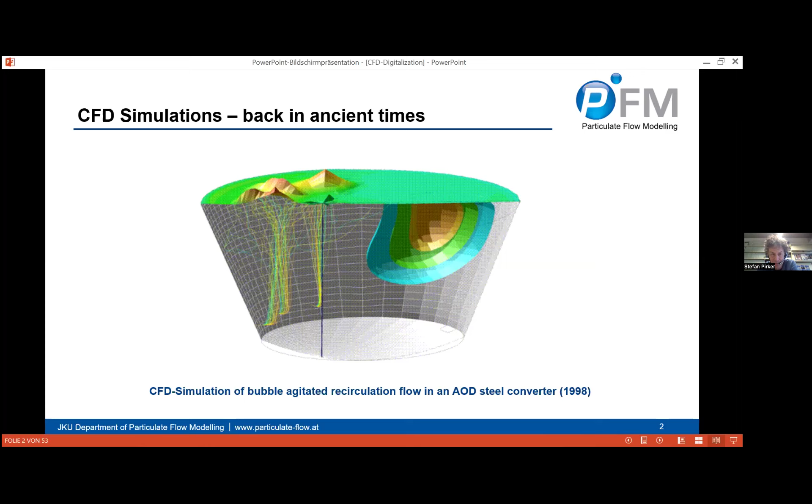And at that time, Fluent was written in Fortran, and we performed the simulation on a structured grid. And at that time we did not have any model to really model the free surface, so we had to deform the grid accordingly to model it. Then about 14 years later,

So, but if we look at it from a different point of view, then we see, okay, also the model portfolio has improved tremendously, and also the resolved spatial and temporal resolution has increased tremendously. Those simulations are way beyond real-time capable. So they can be considered as slow and offline digital models.

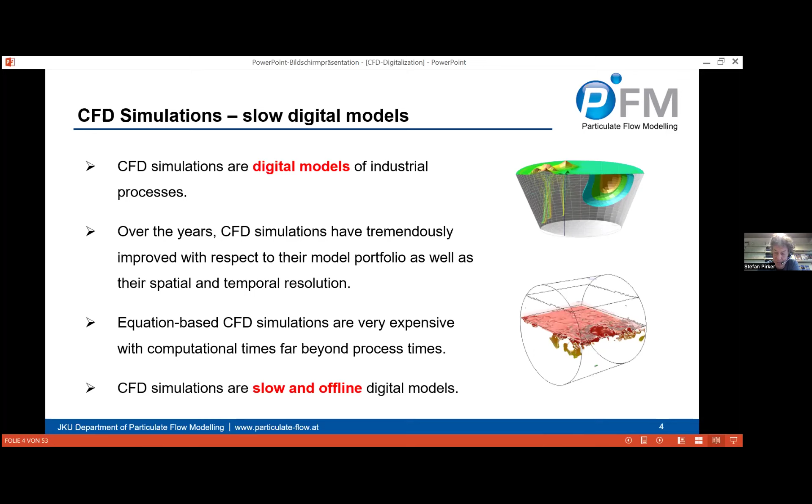And if we would like to achieve what is written in the title of my presentation, so from slow offline simulations to online digital twins of industrial processes, we have to use completely different approaches. So we have to go away from this purely equation-based approach towards some data-assisted approach. And this is the topic of my today's presentation.

So I've organized this presentation in two parts. In the first part, I would like to introduce the concept of recurrent CFD, which is one of the possibilities of data-assisted simulations. And in the second part, I would like to showcase an industrial application, because I've heard that this audience is more on the industrial side. So let's jump into the topic with the first introduction.

Do you see my mouse? Yes, it's visible. No problem.

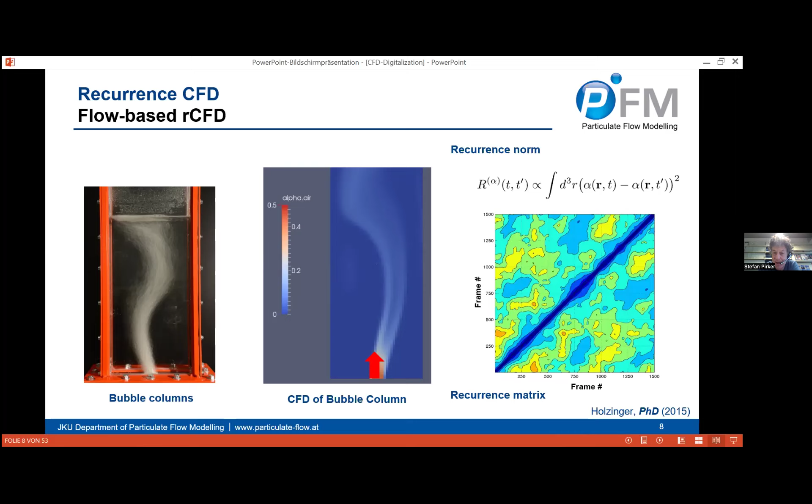So if the plume is on the right-hand side, then this integral will give a low value, if at another instance of time it's also at the right-hand side. And we could also picture this by a recurrence matrix. In the recurrence matrix, we compare the flow situation at different time steps with the flow situation at another time step. Quite naturally, the diagonal is 0, because if you compare a flow situation to itself, the recurrence norm would be

0. So if you restart this movie, then we see that the corresponding recurrence matrix also changes from a chaotic off-diagonal situation to this kind of stripes. And these stripes are a sign for reoccurring flow structures. So a pair of flow situations between this time step and this time step gives a bluish off-diagonal situation, which refers to a good agreement of these two pairs. And the red one would be a bad agreement. This would be if the plume is just on the other side.

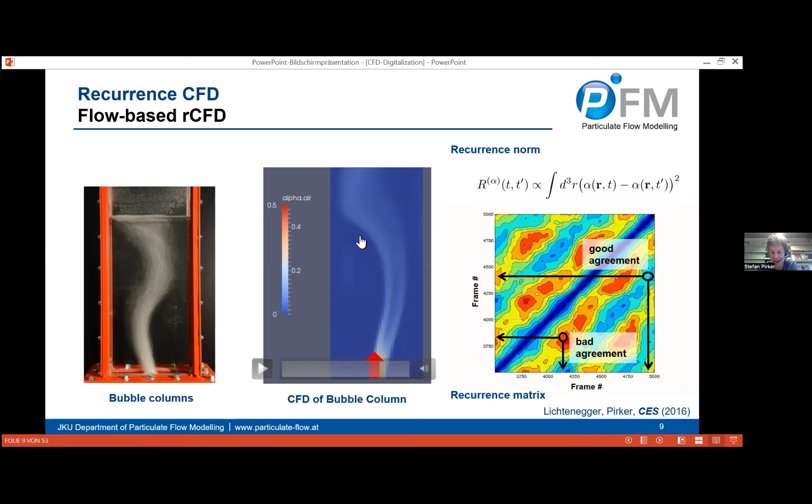Now we could exploit this similarity in order to construct an artificial flow. So we just start by replaying data we have obtained before for sequence 1. Then at the end frame of sequence 1, we just look for a similar frame. In this case, the similar frame is in the past of our database. Then we stitch together, we proceed with the second sequence. And at the end of the second sequence, we look for a similar frame and so on. So we could kind of extrapolate the flow beyond the time span of our database.

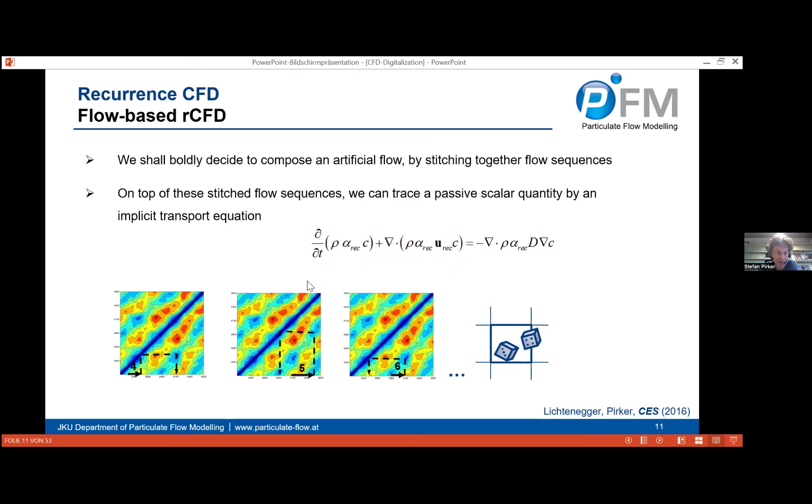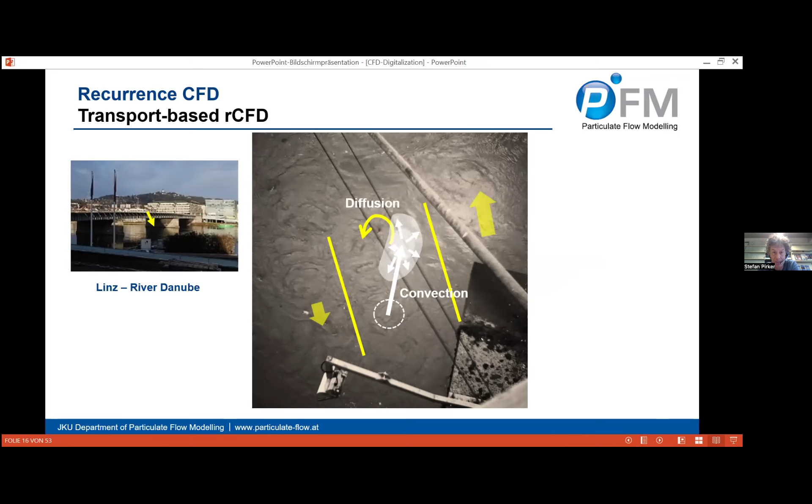What I've described here is labeled flow-based rCFD, and the second flavor is transport-based rCFD. And in order to explain the transport-based, I invite you to Linz, to my hometown. There's the river Danube, and if you look down to the river Danube, you see something like this. So there's a shear flow at the pillar, and if you just imagine to throw some white color into it, then this white color will be affected by fluid flow, so it will move a little bit like this. And from a fluid dynamic perspective, we could decompose this flow situation into convection and diffusion. So we all know that there is a mathematical fundament for this kind of flow, which is Navier-Stokes, and typically we apply a computational grid in order to solve this Navier-Stokes equation, in order to describe this propagation of this white color.

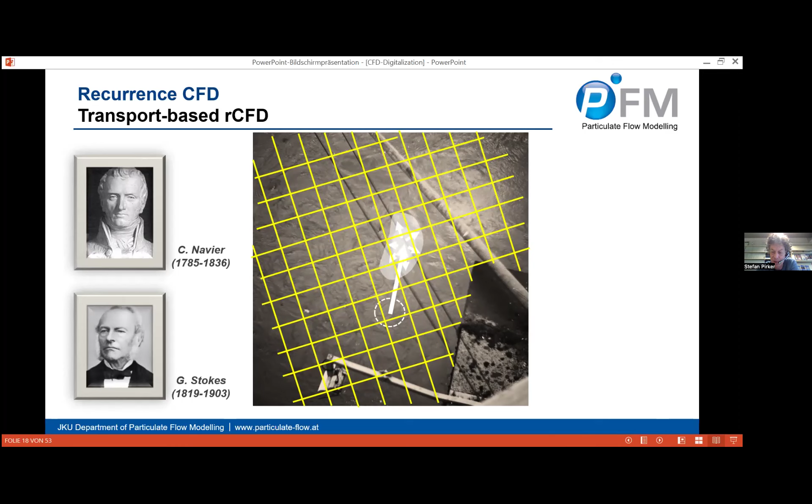However, we could also look at the same situation from a completely different point of view. We could consider this computational grid as a network, a communication network. And once we throw in the white color, we activate one cell. And upon convection, this cell just calls another cell, the receiving cell. And upon diffusion, this receiving cell just shares its information with the neighbors. So that's a very, very crude approximation of convection and diffusion. So we shall boldly decide to replace convection by cell-to-cell shifts and diffusion by face swaps. So this is a very, very crude approximation.

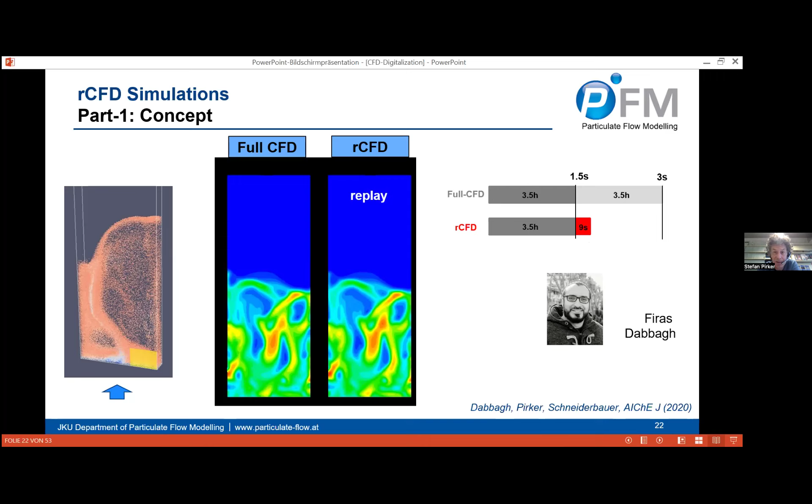So let's see how this compares to each other. And very, very surprisingly, you nearly see no differences. You have to be very careful to see any difference. And in this case, once again, no transport equation is solved. It's just cell-to-cell shifts and face swaps. And due to this simplicity, the simulation time dropped from more than 3 hours to just 9 seconds.

Okay, so I really roughly introduced the concept of rCFD and also addressed mixing in fluidized beds. In the next couple of slides, I would like to talk about segregation in fluidized beds, so polydisperse fluidized beds. And this was work done with Stefan Heinrich's group.

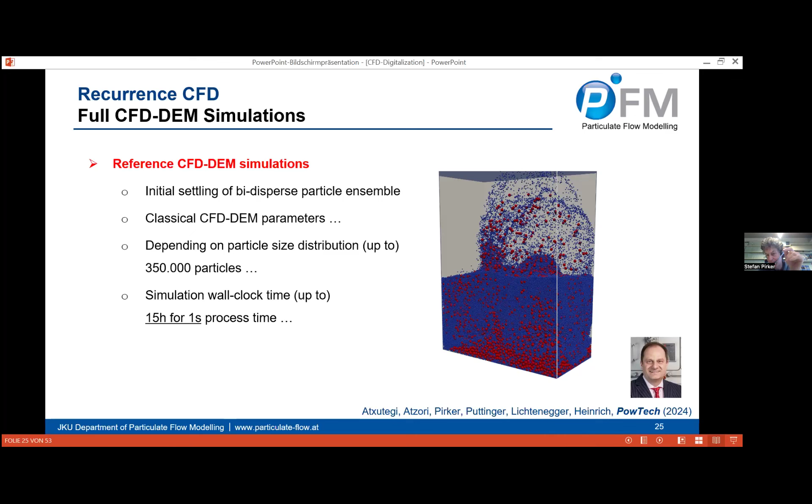So how could we model this in the framework of data-assisted rCFD? We thought about introducing a drift velocity for individual particle fractions. The drift velocity should depend on the difference between the diameter of the particle fraction, so small or large particle, to the Sauter mean diameter. And the difference squared times an empirical constant gives us a drift velocity. And we further implemented this drift velocity as directional face swaps.

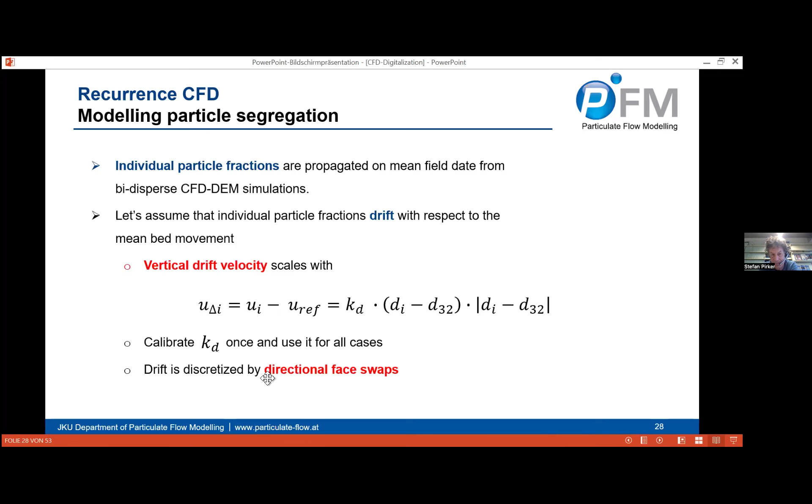And this is a very, very complex situation because we have argon in liquid steel, so a huge density difference. We have the expansion of the argon bubbles towards vacuum within hardly 1 meter. So these bubbles are virtually exploding in the vacuum chamber. And there is no chance to mimic this by some water-air experiments. So we have to trust our simulation tools.

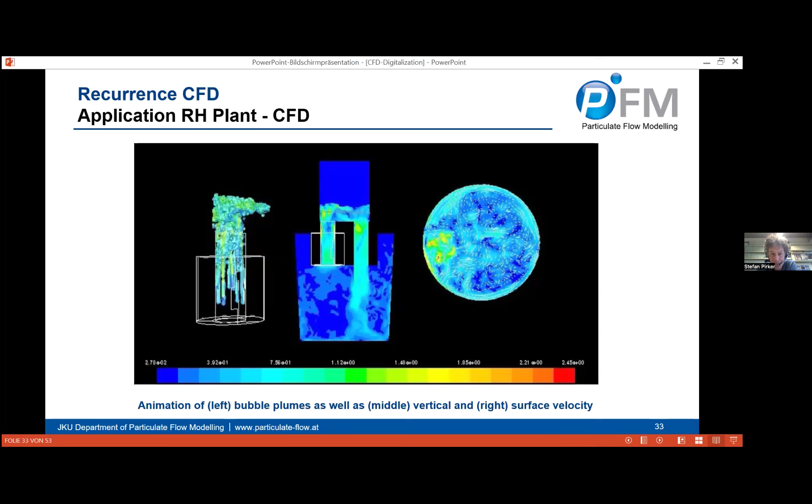In the first attempt to at least get some indication of plausibility, we looked into the real plant. There's a camera installed, and we could make a PIV assessment. And we could at least conclude that a RANS model would not do the job. So we need some scale-resolved simulation in order to picture this recirculation flow. Once we have done this, and we more or less trust CFD, we can deduce our database for rCFD, for recurrence CFD. And once we have recurrence CFD, we could look at, for instance, the distribution of titanium.

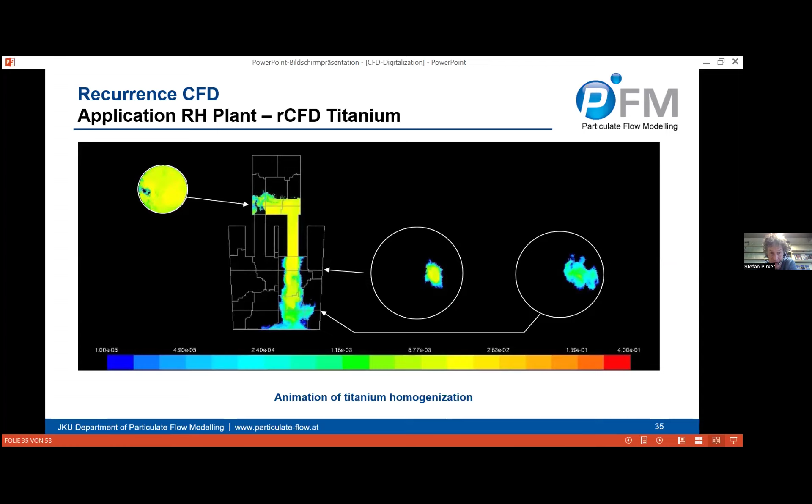So they throw in titanium here on top, and we could virtually follow the dissolution of titanium in real time. So this is a computational grid of 3 million cells, and this simulation runs in real time. So this leads then to histograms like this. So we can assess the heterogeneity of the steel melt over time.

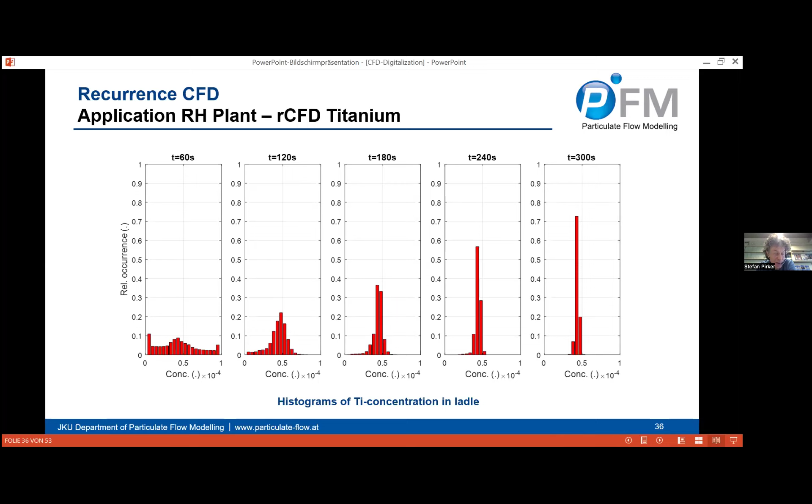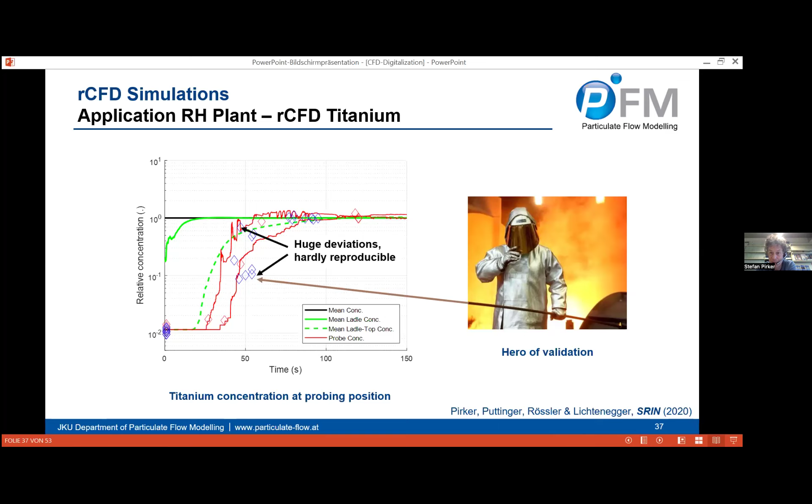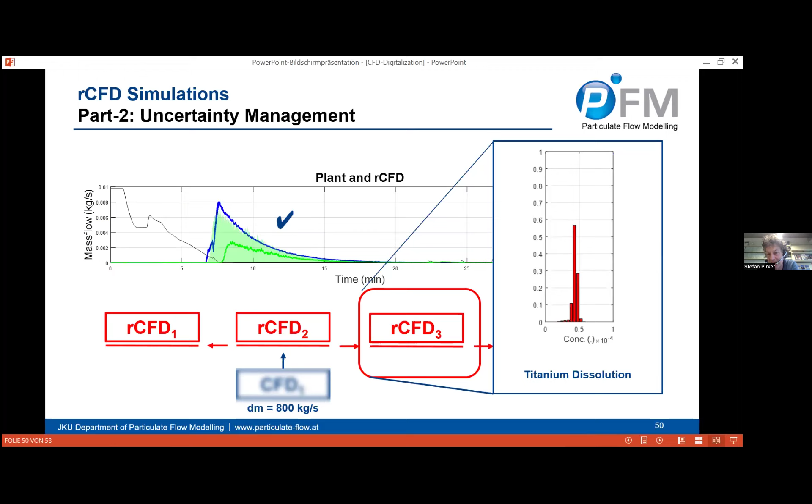And on the fly, so during the operation of the industrial process, we compare the predictions of each of these rCFD simulations with the real measurements. So this is done with this green shaded curve. And once we have done this, we could choose the simulation which fits best. And this is the most reliable or trustworthy simulation. Once we have chosen the most trustworthy simulation, we can then look at other properties of this simulation, which would be, for instance, the dissolution of titanium at this point of time.

Okay, this was a very rough presentation of what we are doing, and I would close this presentation with an outlook. So CFD simulations themselves of industrial processes will continuously improve in future. And I think this holds for fluidized bed simulations as well as for simulations of bubble columns, of any multiphase flow simulation, of any turbulence simulation.

And kind of decoupled from this, we can provide rCFD, so recurrence CFD, as a workflow from this purely equation-based CFD towards an efficient 4-dimensional representation of transport processes. And this is so efficient that in many cases this runs real-time or faster than real-time. So rCFD, that's the third point, runs concurrently to the industrial process. And by on-the-fly comparison to plant data, its reliability can be assessed.

And once we have assessed its reliability, we can just look at a huge amount of data, and we could get valuable information, for instance, about process heterogeneities. And in many cases, process heterogeneities directly relate to product quality or to process failures, like in the case of defluidization. So I hope I'm still in time, and I would like to close this presentation.

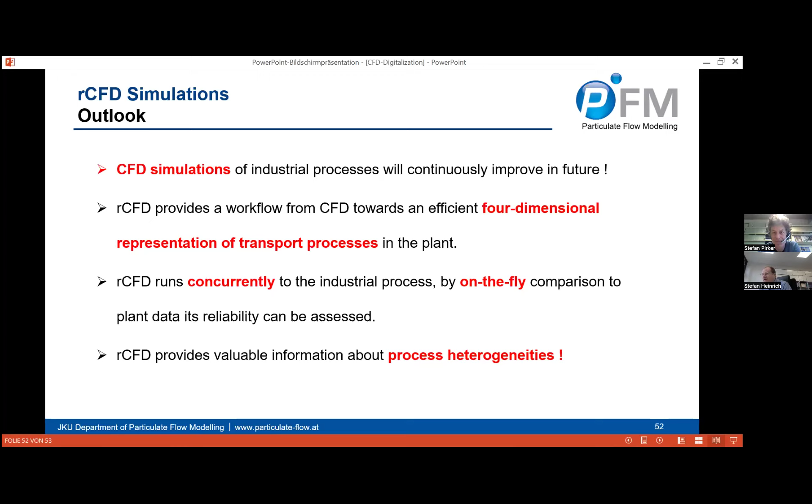Thank you so much, dear Stefan. It's even impressive to see how the recurrence CFD can improve things. Yeah, and this very fast simulation technique allows us to do much more, which has never been done before.

Yeah, there's a first question in the chat, if I can read the question, from Professor Penn from our university in Hamburg here. Thank you for the great talk. Are there certain particle systems, for instance, flow conditions, geometries, particle types, for which recurrence CFD works very well, and others for which you would not recommend the technique? Good question. Okay. Yeah, thank you for this question.

You know, recurrence CFD has this term recurrence in its name. So this is some requirement. So the particle system you have should have some reoccurring flow features. Otherwise, the concept of storing flow features and then addressing them would not work. But you know, this essentially holds for all data-based simulations. So also all these simulation techniques which are coming up now, they somehow rely on the fact that your trained system has already seen similar situations before. So this is maybe one

answer. So it's not suitable for a situation, for instance, if you have hopper discharge; this is not a pseudo-periodic process. But you could also address hopper discharge. If you make many hopper discharges, one after the other, and kind of replay it, then it's possible again. So I'm not sure how strict this criterion is, but as of now, you need to have a pseudo-periodic flow with recurring flow patterns. Yeah. Thanks.

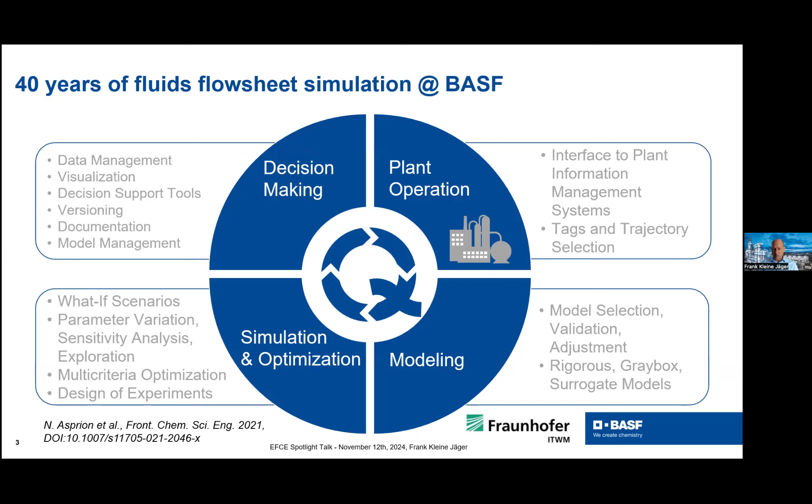That's quite interesting, but this has always been done for fluids, never for solids. So with this new idea, we are trying to bring something really new into BASF: the flowsheet simulation of solids.

Today, on the one hand, we make use of Excel, very simple process modeling tools, where we use empirical correlations. That's working very nicely. But on the other hand, we also make use of very detailed simulation, for example discrete element modeling, CFD, or coupled CFD-DEM. We have very detailed information on the other hand. Now the idea is to bring it all together — this detailed simulation, this information on multi-scales, into the flowsheet modeling approach, but also the information we get from the more simple process modeling.

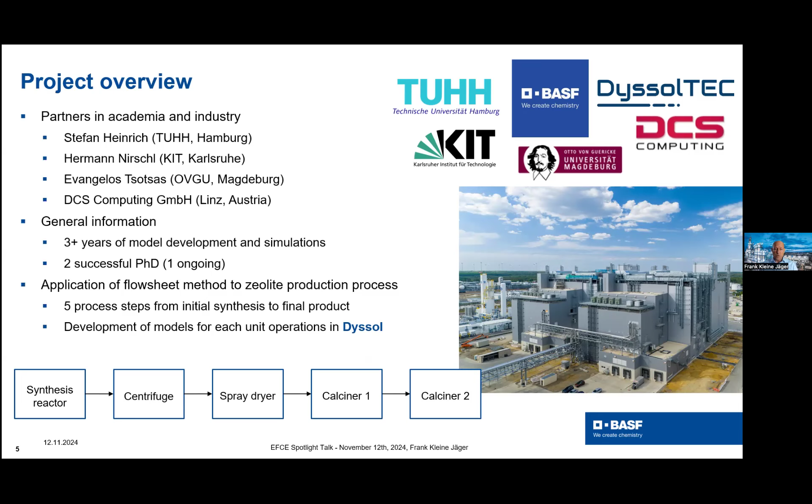The company DyssolTEC, as a startup from the Technical University, was generated and funded.

We also said we need an industry consortium to support this further development. Companies like Evonik and BASF are partnering up now, and we are still looking for others to support us here. With this industry consortium, we believe we will get successful software development on one hand, but more importantly, continuous support over the next years for this software, including access to a new GUI or development of process models. We also see that DyssolTEC is strongly working on advanced features like a sensitivity analysis tool or the automatic process optimization tool.

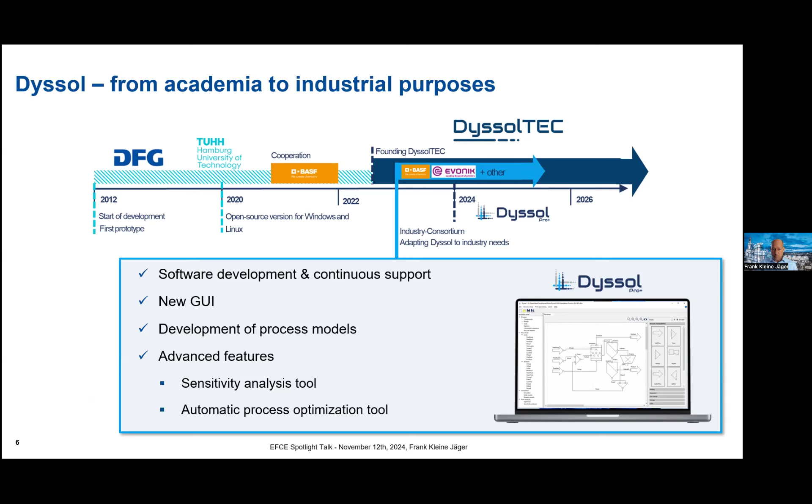Let's take a look at the process we try to mimic. It's about the production of zeolites, typically materials used as a catalyst, an adsorption material, or a molecular sieve. It all starts in the reactor.

Zeolites are typically aluminosilicates that have active sites that act also as a catalyst, formed in a reactor that is typically run in batch mode. Then we hand over this product to a more continuously operated sequence of unit operations.

It starts here with the centrifuge. Here we have input parameters like the mass flow, the solids concentration, and the particle size distribution that comes out of the reactor.

We track these parameters going to a nozzle where we generate a spray that is introduced into the spray dryer. The spray dried product, with residual moisture but also residual carbon content, so with organics, is then fed to the calciner.

We separate this into two parts, calciner 1 and 2, because of the exothermic reactions of the organics, which require this split.

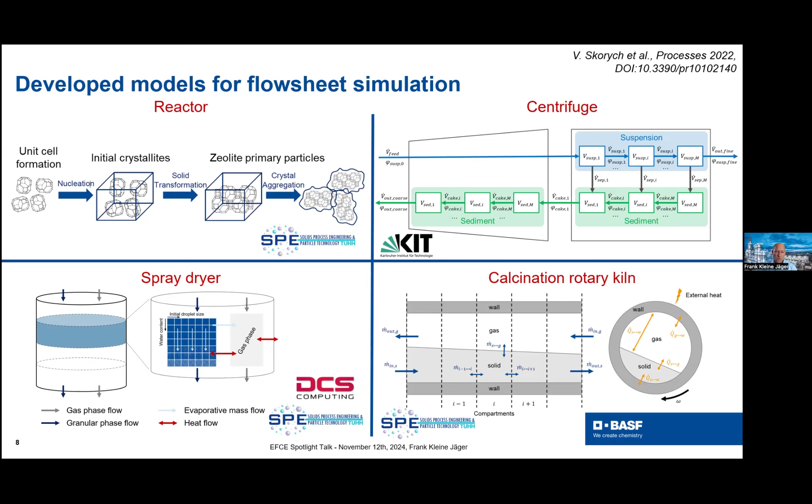First of all, we needed to come up with a suitable model for the precipitation process. In the first step, we tried to get information about the flow profile inside the precipitation vessel by use of CFD computations.

Finally, DEM is used to generate statistics on the particle collisions for various values of process and material parameters, to describe the particle aggregation and particle growth inside these volumes.

This information is then used to find the individual contributions of several empirical agglomeration kernels to the overall growth and the particle size distribution.

The found contributions, along with the variation of process and material parameters, are used to train a data-driven surrogate model of the agglomeration kernel, which is an artificial neural network.

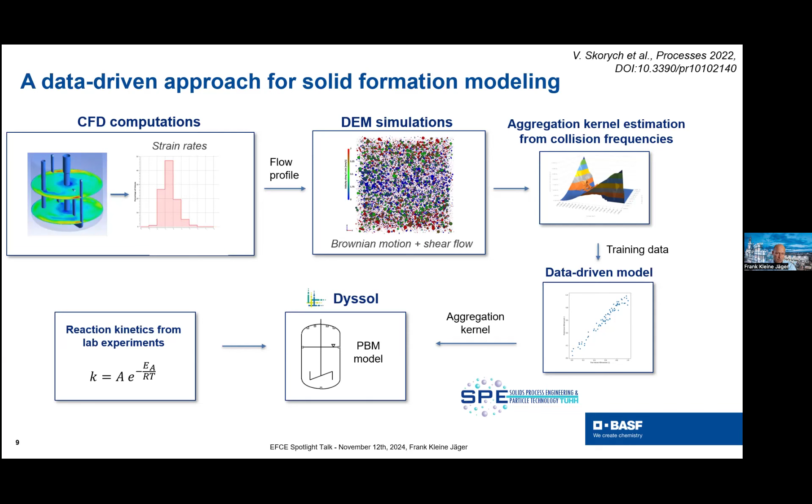The finally derived kernel, together with the information about the reaction kinetics, is applied to build a population balance model used in the flowsheet simulation. That's the first unit operation we were working on.

The second unit operation is a decanter centrifuge, where the synthesized solids are separated from the liquid phase. The feed enters the centrifuge via a pipe, and in the cylindrical and conical bowl a rotating liquid pond is formed. The screw conveyor transfers the sediment from the left to the right-hand side, to the conical part, and the centrate leaves the centrifuge over an overflow weir.

The solid-liquid separation stage is described by a multi-compartment model, developed by colleagues at KIT, from Gleis et al. in Hermann Nirschl's team. It considers sedimentation on the one hand, but also compaction of the cake on the other hand.

To mimic the phenomenon of the spray dryer, a multi-scale and multi-compartment model was developed by Moritz when he was at university. This model considers the different drying kinetics and also the particle solidification inside the spray dryer. In addition, we also take a look at the heat and mass transfer, as well as the heat loss over the spray dryer wall.

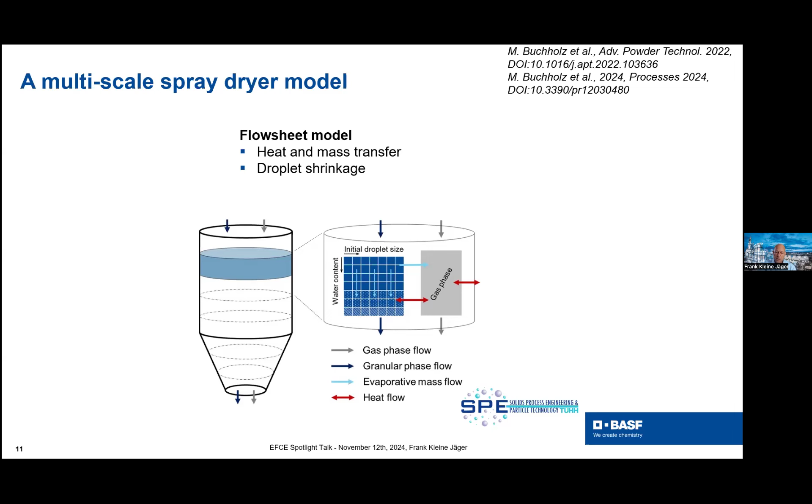We also need some information about the flow inside the spray dryer. Here we make use of CFD simulation to get this information and hand it over to the flowsheet model, which is important to increase the accuracy of the model.

Finally, we also try to get information about the particle morphology. Here we make use of coupled CFD-DEM work of the single droplets. For example, depending on the drying kinetics that are established, we can mimic the formation of different morphologies.

In this case, it's a hollow sphere. Having this information is, of course, of great help if you work in the field of product design.

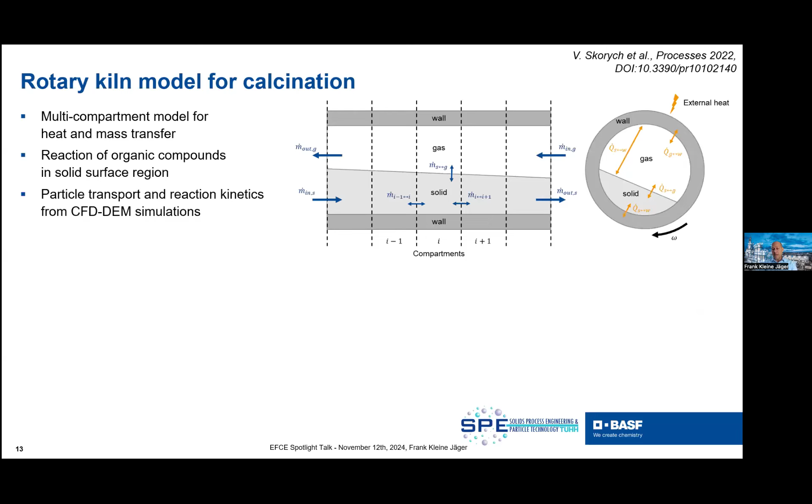Finally, the calcination of the zeolites is performed in a rotary kiln. It is described again by a multi-compartment model that mainly reflects the gradients along the kiln axis. The model is based on work of Küssel from RWTH Aachen.

We have information on particle movement and reaction inside the solid bed, which is extracted from coupled CFD-DEM simulations. We have different phases inside the calciner: the solid phase, the gas phase, and also the wall. Here, of course, we have different heat transfer phenomena.

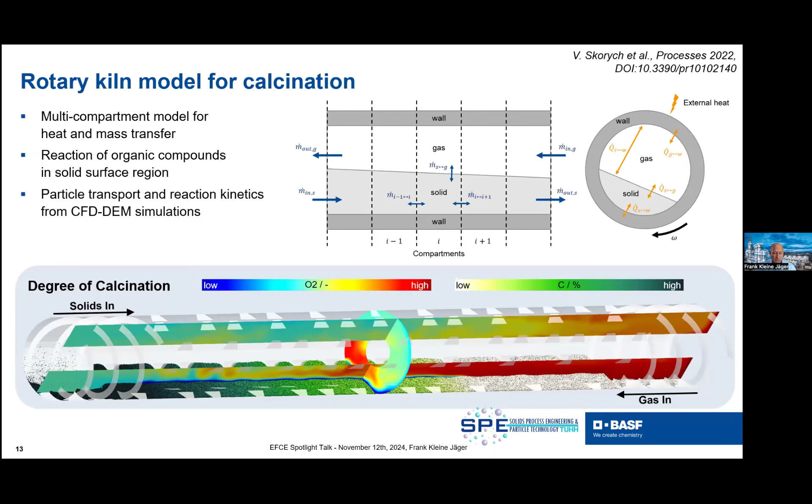We try to get especially information about the temperature at the inner wall of the rotary kiln, because this mainly affects the heat transfer to the gas and also to the solid. To get this information, we set up a collaboration with the University in Magdeburg to get access to the data.

We then started to measure the flow regime. We did this for different materials without the use of internals, mainly to identify the different process parameters. In the second step, we made use of different materials.

We measured the heat transfer using this smart thermocouple setup, again without the use of internals. In the third step, we then tried to vary the internals in number, in size, and in geometry.

We took all this information and used it for feeding our simulation that I showed one slide earlier.

Let us now take a look at the results from the flowsheet simulation. The first part of the flowsheet is the reactor, which we run as a batch process, and then we hand over this data to the continuously run process consisting of the centrifuge, the spray dryer, and the calciner. Here the process time is 2.5 hours.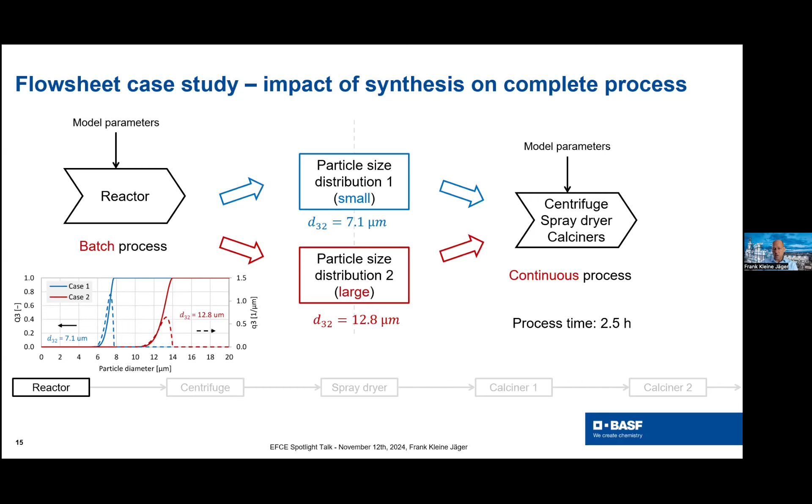In scenario two, we decided to go for a coarser particle size distribution, so here the mean diameter is 12.8 microns, and this is then handed over to the subsequent unit operations.

Now we enter the centrifuge, and here in the top you see case 1, in the bottom scenario 2. You see, due to the different sedimentation behavior of the coarser fraction, you also end up with a higher solid concentration of 19.5% compared to 17.6% for scenario number 1. That means here already we see a huge difference in the different scenarios, and the throughput is also somehow differing because combined with the higher solid loading, we also get a higher mass flow of 1096 compared to 1052 kg per hour.

Now we go to the spray drying. We say that we start with the same droplet size distribution in case 1 and case 2. Now we change from solid loading to water content, and here we see that we start with 82% of moisture loading, and here we see that this is slightly less, but when you take a look at the numbers that are calculated, we see that we end up with more or less the same aggregate particle size distribution of 120 micron in scenario 1 and scenario 2. But again, you see that the mass flow in the two scenarios is different.

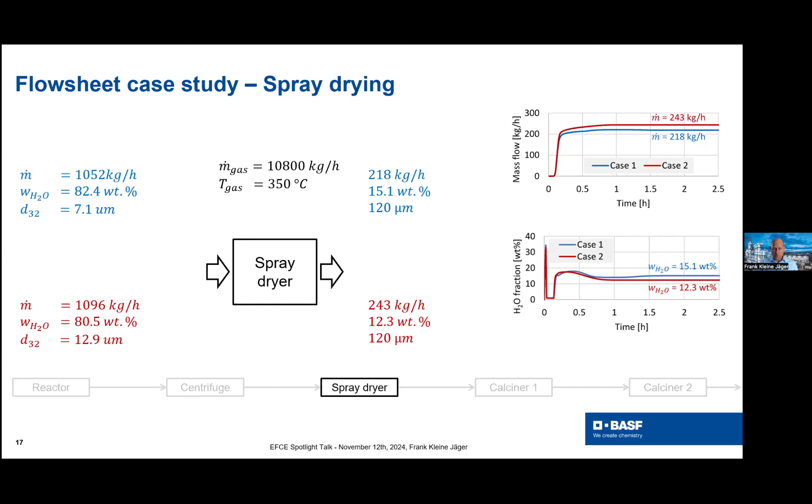From the spray dryer, we now come to the calciner. I said that we also have an organic fraction as part of the solid product. So 10% of the overall solids are organic residues. Here we try to get rid of the residues inside the calciner, and we also try to get rid of the moisture. So we separated the calcination into two single calcining steps. Temperature here, 700 degrees C. We start with an amount of 5% of oxygen. And then we end up with no more residual moisture and a slight reduction of the organic part from 8.5 to 5.7 weight percent.

In scenario 2, we have no more residual moisture as well. And we also see that we have a reduction in the organics here as well. And now finally, the second calciner step, and here the residual moisture on the one hand, but also the total organic mass is coming to zero. But you see in the final end that we end up with two different scenarios of the throughput through the overall process. And this is exactly also what we are seeing in the real world in our production process.

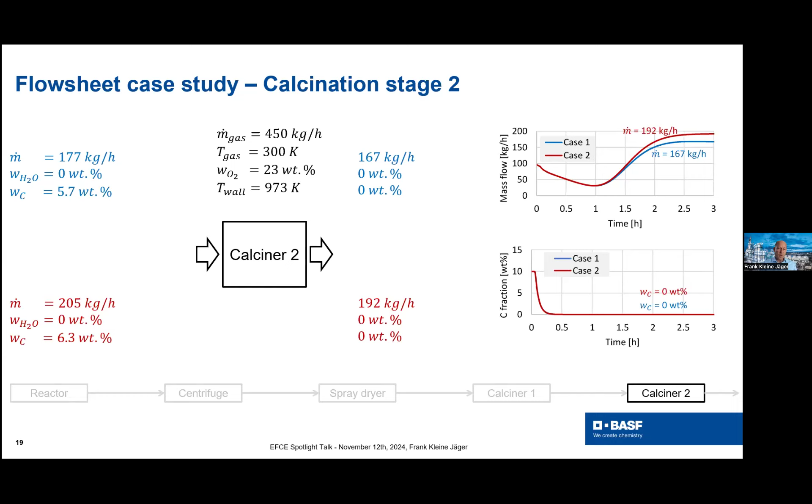So by changing parameters in the precipitation or in the solid liquid separation step, we can definitely influence throughput or even the morphology of our products. And this is something that we were now able to really demonstrate by help of this solids flow sheet simulation approach with the software Dyssol. And we were pretty happy that we really were able to mimic the phenomena we see in reality also by help of this software.

You can imagine that at BASF we have quite a number of pretty interesting applications where we think that this solids flow sheet modeling approach is of great help. And we already use this tool for scaling up a complex solid operation, and here we see that it really helps us. For example, for this scale-up project, we saw that we get a very nice prediction of starting parameters per unit operation that we have built in steel. We took this in operation, and we saw that it matches very nicely. By this, we were able to really bring down the startup time very effectively.

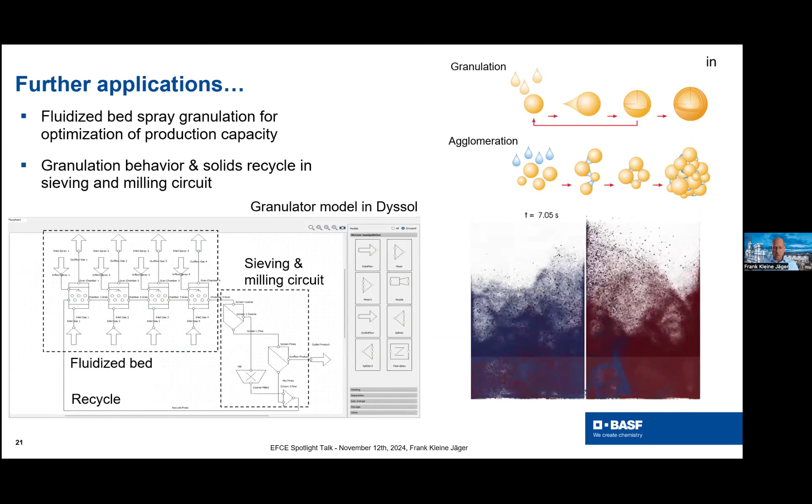Here, for example, we would like to make use of this approach also for this belt drying technique. On the other hand, we believe that for all the granulation techniques we have, it might be of great help, for example, to mimic the fluidized bed spray granulation and lots of other applications where we definitely see a huge benefit in the future.

And this brings me already to the end of my talk. So in my opinion, solids flow sheet modeling really provides very valuable insights into the overall process behavior. We were able to demonstrate this for our zeolite process, but we have, as said, many ideas how to duplicate this in future. Then we see that this collaboration that we have set up with Dyssol Tech and also the industry consortium is pretty helpful, on the one hand for the development of models, but also for ensuring that we get the sufficient maintenance, because we cannot provide this.

And as I said, we believe that we finally will end up with much faster and much more precise scale up and tuning of our apparatuses and plants in the long run, to support our BASF internal business partners. With this, I hope that I was able to raise your appetite towards the use of Dyssol for solids flow sheet modeling.

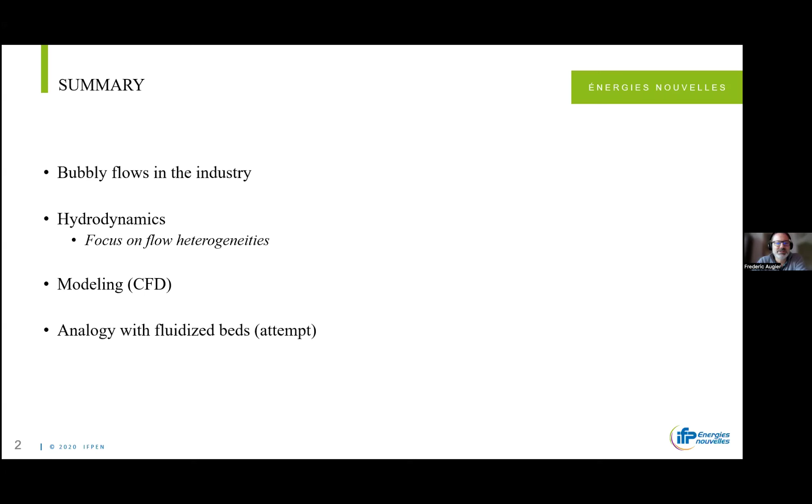So, as you probably all know, bubble columns are very, very popular in the chemical industry for different reasons. They have moderate to high transfer performances, mass and heat transfer. The gas phase is almost plug flow, which is generally a good point. The major part of the volume is filled by the liquid, so it means that if you need a long residence time of the liquid phase, you can achieve this with a bubble column. It also means that you are dealing with rather slow kinetics, or that you need large thermal inertia in the reactor to dilute the heat of reaction.

But the main reason of this popularity is that they are very simple and cheap compared to other reactors. These are basically an empty column. So it is cheap, and many times it's sufficient to achieve what we want to do. I have written here a list of applications that I have seen, but probably it's not exhaustive, and we can add many more. It is very used for oxidation of hydrocarbons. Also at IFP, we use bubble columns for oligomerization of ethylene. They are also used for other applications such as ozonation, wastewater treatment, hydrogenation, and also aerated fermentations.

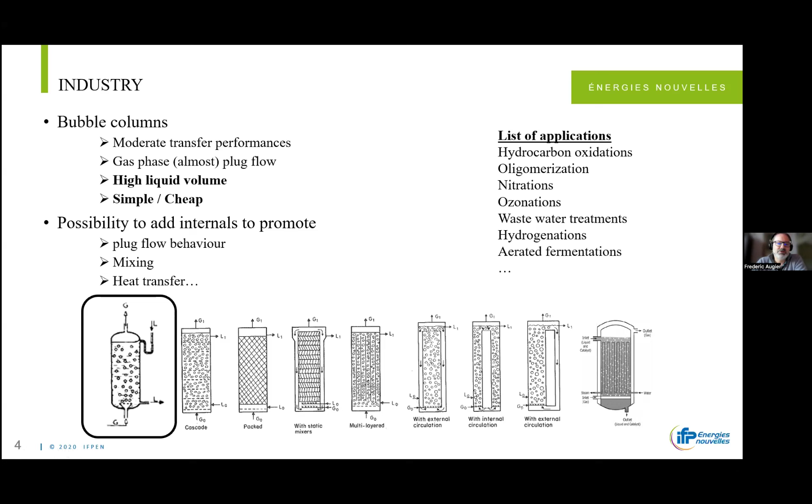Of course, we can add some internals if we want to promote one behavior, like the plug flow behavior of the liquid phase, or if we want to promote the mixing at low gas flow rate, we can add a tube inside and so on. But in this presentation, I will focus on the classical empty bubble column with no internals.

Concerning the bubble size, we can use photographic measurements, but if we are outside the column, we will only see the bubbles close to the walls. If we want more local measurements, we can use endoscopic probes, or in our case, optical probes. For optical probes, there are different techniques, like the multi-probe measurement techniques that are based on the assumption of vertical bubble trajectories, and we can calculate bubble chord distributions with them, but only if the assumption is reached. I will come back on this point, especially for the heterogeneous regime. In our case, we prefer to use an in-house method that I will also introduce after.

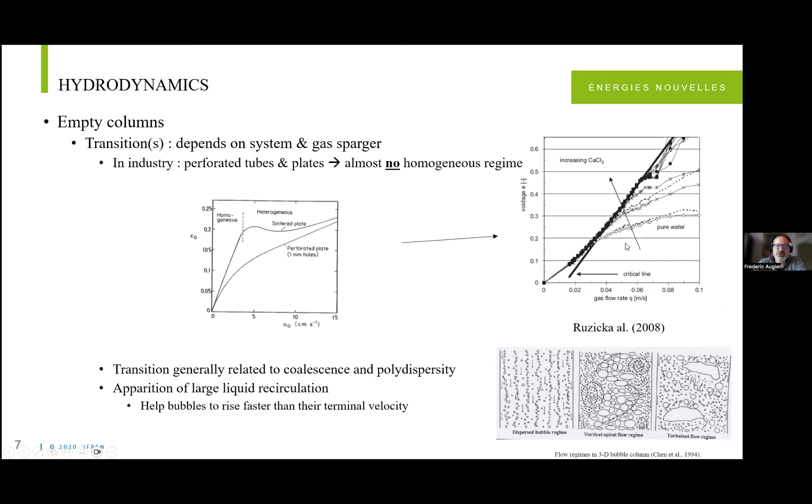If you are interested in the transition between these regimes, which is not the focus of my talk, I can give you some references, as here from the group of Ruzicka, also the group of Nedelchev, and also some recent works of Milano with Giorgio Besagni and Fabio Inzoli that propose some criteria to predict the regime transition. Concerning what we do here at IFP, we focus more on the heterogeneous regime because this is the regime that we have mainly in our applications, and I will go more in detail about this heterogeneous regime.

So this is a classical movie from a heterogeneous regime. We have 15 centimeters per second of gas. It is air in water. You see how turbulent the flow is and also the structures inside, very unstable.

So what we have done during the last years, we have tried to compare the flow between different bubble columns of the same geometry with exactly the same tap water and the same perforated plate used for the gas injection. And we have investigated columns from 0.15 to 1 and 3 meters of diameter just to see the effect of the scale-up on the flow.

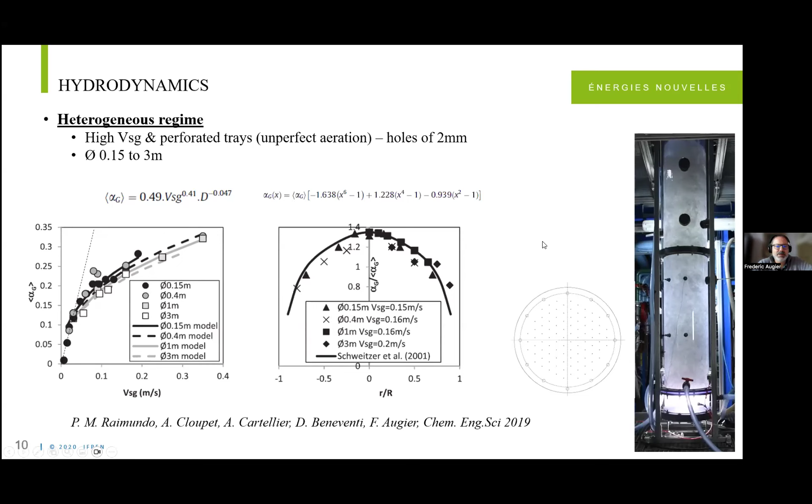Concerning the liquid velocity, we did the same characterization using the Pavlov tube, and we have the same conclusion: all these average liquid velocity profiles are similar when normalized, this time by the liquid velocity at the center of the column. So you see these results for columns of different sizes. These are only some samples of results. But if we normalize the liquid velocity, we always have this parabolic profile.

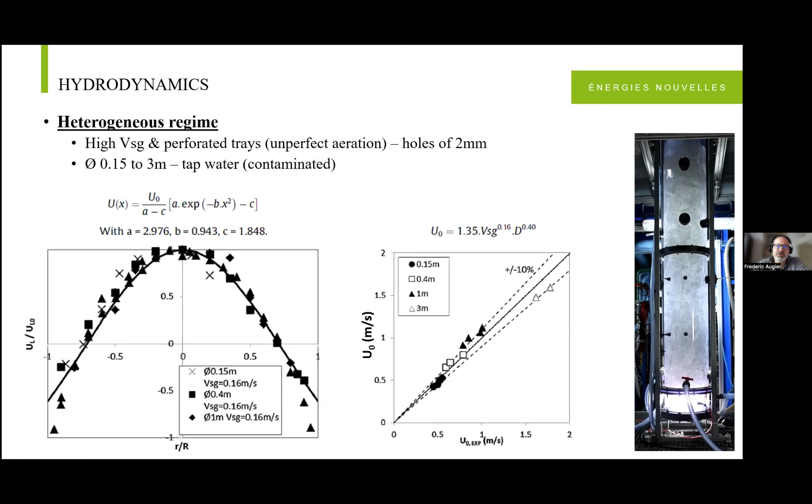But the liquid velocity at the center changes a lot with the scale, because it's mainly a question of VSG, of course, but also there is a very large effect of the column diameter on this velocity profile. Concerning the bubble size, we wanted to characterize the bubble size at these different scales to see the effect of the scale-up.

As I said briefly, classical multiprobe techniques are based on the assumption of vertical trajectories of bubbles, which is not the case when we are in the heterogeneous regime. And some bubbles are coming from the side of the probe, so it's very difficult to calculate a bubble size distribution and even a chord distribution.

So we have proposed to develop a new technique which is based on the use of two optical probes, but not using the assumption of the trajectories of the bubbles. We measure only the spatial cross correlation between the two probes, which are located at the same level in the column. So let's consider that we have this small distance between the two probes, which is basically a few hundreds of microns, and the bigger the bubble compared to this distance, the higher will be the cross correlation

between the two probes. It means that if one probe sees a bubble and is inside the gas, there is a large probability that the second probe is also in the gas. But if now this bubble is small compared to this distance, the cross correlation between the two probes will be much smaller. And we have calculated theoretically that there is a strong link between this correlation coefficient and the ratio between the distance and the radius of the bubbles.

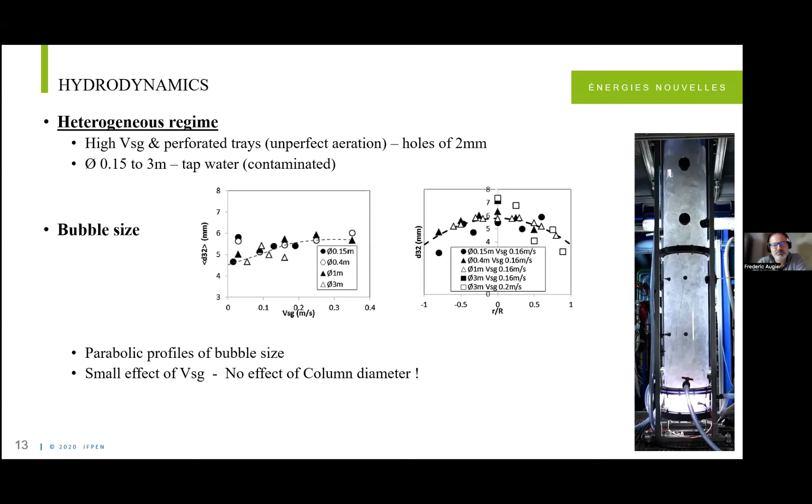And at this stage, we have also tried to investigate a little bit more the heterogeneities that we have in these bubble columns, and we have tried to answer 3 questions. The first question is, do we have some clusters of bubbles inside the bubble columns when we are in the heterogeneous regime? The second question is, what is the effect of the heterogeneous regime on the bubble size distribution? And can we estimate also the relative velocity between the gas and the liquid in this regime?

So for the first question, we did different studies, but I will just report one. It was using also the same technique of cross-correlation between 2 probes, but now we have increased a lot the distance between the 2 probes, several centimeters between the 2 probes in the column. And if we have a cross-correlation higher than the gas volume fraction in the column, it means that we have some organized structures in the flow at this scale.

And this is what we see here, that we have a cross-correlation that is higher than the gas volume fraction, even at some centimeters, which is a scale much larger than the size of the bubbles. And we have done this characterization of cluster size at different conditions of gas velocity and for the different scales of column. And we believe that we have clusters of 3 to 5 bubble diameters in the column.

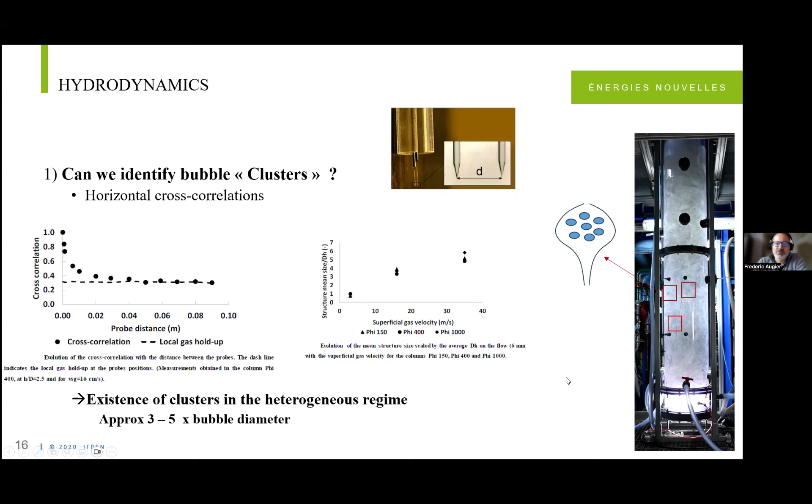And these clusters are probably responsible for the structure of the flow and the instabilities of the flow, because they are going very fast in the column. And we can see some of them in the pictures. If we look carefully, we see that we have some areas where we have high concentration of bubbles locally.

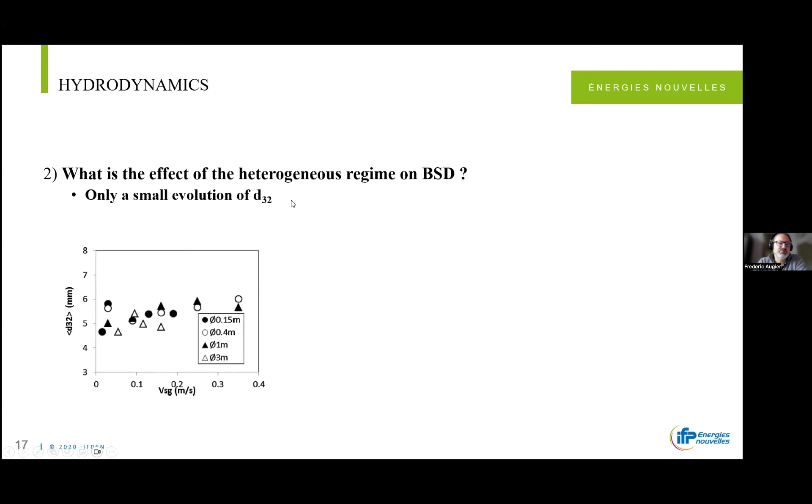The second question is about the bubble size distribution that we have in this heterogeneous regime. It's difficult for us to measure something quantitative apart from the bubble size, apart from the Sauter diameter. But anyway, we have tried to use these conical probes, also made by the A2PS company. We know it's risky because we can have some errors in the results, but this is the best we can do.

So we have also tried to measure the bubble chord distribution in the different regimes. You can see the results in terms of chord distribution in columns of different sizes, and for small gas velocity, so 3 centimeters per second, we are in the homogeneous regime, and for higher velocities we see that at all scales, when we are in the heterogeneous regime, we increase the range of the chord size distribution, and we can see some bubbles of 2 to 3 centimeters diameter.

But their probability is small compared to the average size. So yes, we see some big bubbles in the column, but they are not sufficiently representative in terms of volume fraction to strongly impact the Sauter diameter. So it doesn't change a lot the Sauter diameter, but we have some big bubbles.

So we are very far from the classical representation of the heterogeneous regime. For example, if you look at the papers of Chen or even other papers, a lot of them represent the heterogeneous regime in bubble columns with very big bubbles inside, or bubble caps. Concerning our work, using the tap water that we have in Solaize, we don't have these big bubbles. We have bigger bubbles, but there are only a few, and they don't change the Sauter diameter of the bubbles. So this is a big difference between our results and what we can find in the literature.

The last question about heterogeneities was about the relative velocity. Can we estimate this relative velocity between gas and liquid? To do that, we use the liquid velocity that we measure with the Pavlov tube inside the core region of the column, the region where we have an upward flow of the liquid. Concerning the gas velocity, we don't measure it yet, so we estimated it as basically the average velocity of gas deduced from the total gas flow rate, considering that the total gas flow rate passes inside the core region. This is an assumption, but if we use another assumption, we increase even more the relative velocity. So this calculation is, let's say, an underestimation of the real relative velocity that we may have in the column.

And what we see if we do that is that in this part of the flow, we have relative velocity between gas and liquid which is very, very high, up to 1 meter per second. And we are very far from the terminal velocities of the bubbles, let's say 22 centimeters per second for the average Sauter diameter. And we are much higher.

Even if we consider the biggest bubbles that we have measured with the conical probes, so bubbles of 2 or 3 centimeters, even if we consider this size, we know that the terminal velocity of these bubbles is approximately 30 to 40 centimeters per second, but we are always very far from the relative velocity that we have estimated here.

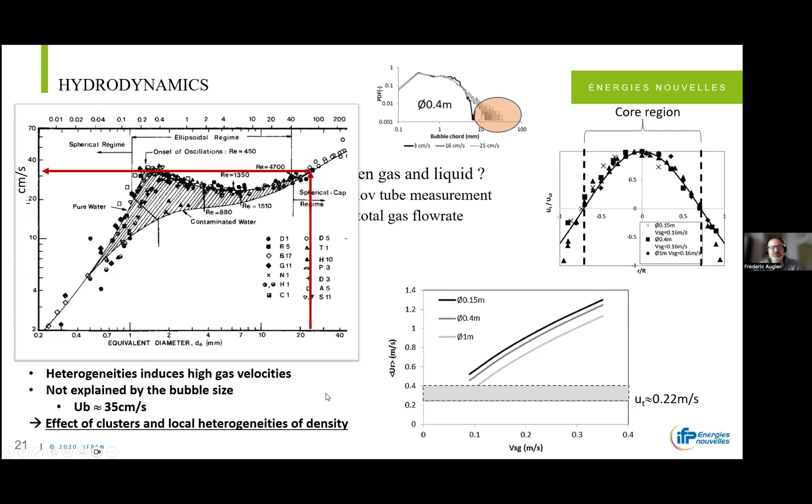So now just a few words concerning the modeling of bubble columns. What we did here at IFP was to use two-fluid models, 3D unsteady two-fluid models, using RANS turbulence modeling. When we are in the heterogeneous regime, we cannot do more than that because we have billions of bubbles inside the reactors, especially if we investigate industrial sizes like a column of 1 meter in height and some dozens of centimeters or more in diameter. So we have billions of bubbles. We cannot do more than use a two-fluid model.

When we do that, we have many possibilities in terms of closure laws, and I'll just say briefly that there are different recipes possible. We see also that different groups propose different closure laws and find similar results. So just before talking about closure laws, I have to say that there is no consensus on them, and I'm still not sure that I propose the best recipe to simulate bubble columns, but this is what we found as good solutions. First, there is the question of bubble-induced turbulence: how can we include the turbulence induced by bubbles?

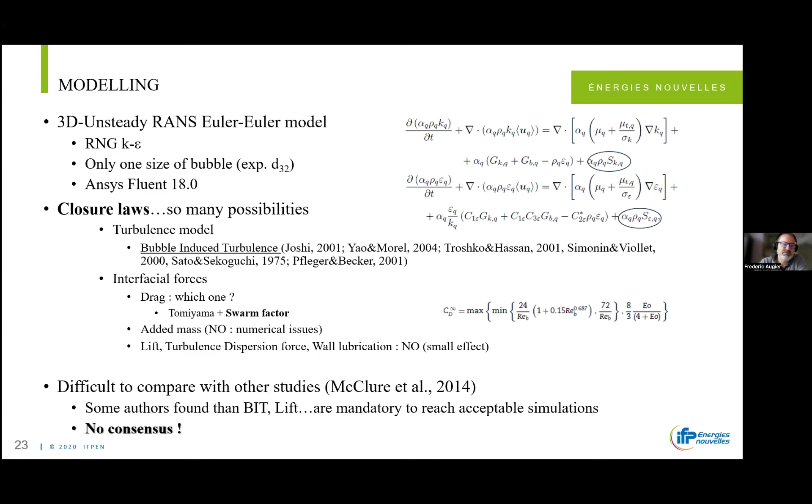But to be honest, I know that some other people say that we absolutely need these forces. We had a lot of discussion with David Fletcher, especially from Sydney, and we did not understand why in some cases people found that we need BIT and lift and so on, and why we did not find it. So I stand very prudent and take some caution about this part.

So anyway, what is important to do, I think there is a consensus on that, is that we need to modify the drag law, and we need to include the fact that at a given gas volume fraction, there is a very strong decrease of the drag law, of the drag force, due to the structure of the flow. So we use the Swarm factor of Simonin, which says that we have a very strong loss of drag coefficient after a given gas fraction.

And we had some good results with this, and this is something also found by McClure. Gemello was our student at IFP, and also some work of Varallo, also using the same drag law. And if we use this, we had very, very good results concerning the estimation and prediction of the gas holdup in the column at different scales. We have also good prediction of the gas holdup profiles in the columns and liquid velocity profiles. This was a part of the collaboration we had with Politecnico di Torino. And we validated this model at different scales, for all the scales we have investigated experimentally.

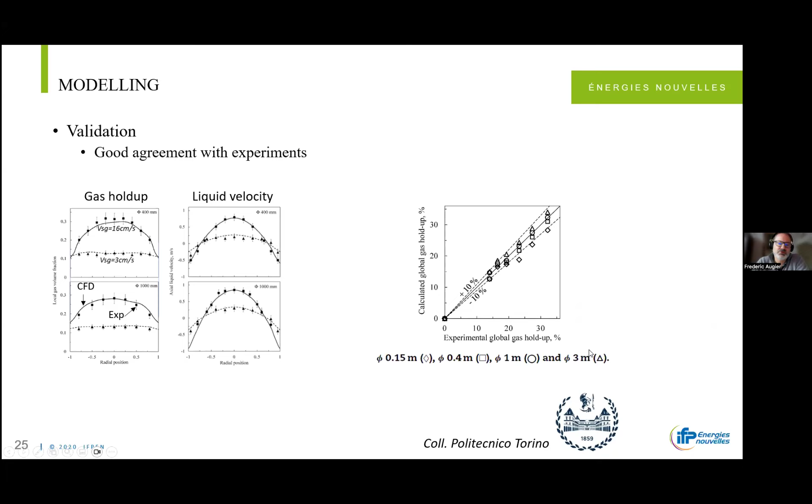Now, I will take a few minutes to talk about some attempt of analogy with the fluidized bed. And this is also why I prepared this part with Mathieu Morin.

Concerning fluidization, of course, we have many differences with the bubble columns, and the first of them is that we know the particles that we put in the reactor. Normally, we know their size, we know their shape, and this is a very important difference compared to the bubble columns. Another very important difference is that we are governed by the particle collisions, let's say the granular temperature in the fluidized bed. And this is something that we generally don't consider, and the collision between bubbles is not so important to consider in the modeling of the bubble columns.

We have very small particle Reynolds number compared to bubbles. And also for the fluidization, we have many subcases depending on the size and the density of the particles we are considering. So you have this famous classification of Geldart, depending on the size of the particles and the density. But generally at IFP, we focus on class A and B because they are closer to the catalyst that we use in some applications.

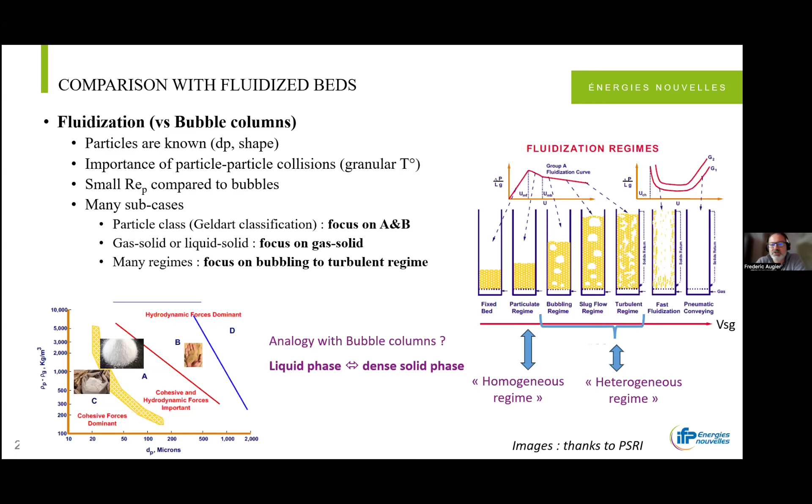Something also interesting is that depending on the classification of the particles, so Geldart class A, B, C, and so on, we can have a difference of transition between the smooth regime, so the homogeneous regime, and the bubbling and turbulent regime. The smaller the particle, the longer will be the homogeneous regime. And if we use bigger particles, we will achieve turbulent regime much faster. So it is very similar in terms of macroscopic behavior to the bubble columns, because if we have big particles, we promote the heterogeneous regime. And in case of bubble columns, if we promote the coalescence in the system, we have bigger bubbles.

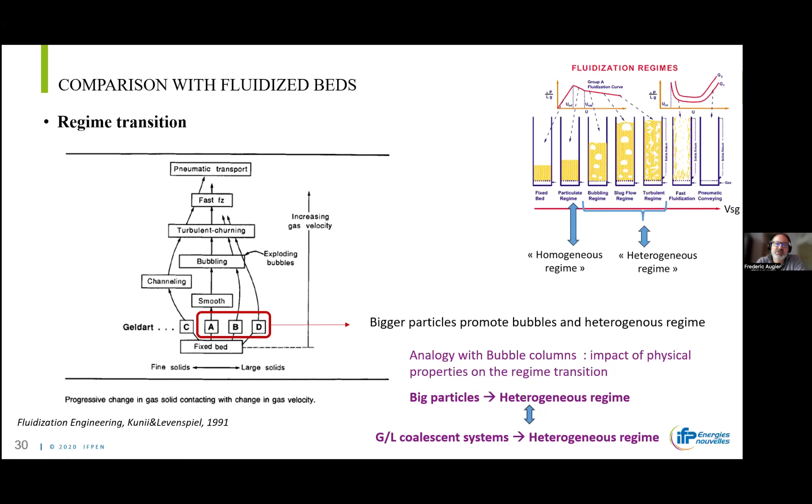And we are going much faster to the heterogeneous regime, and the transition between heterogeneous and homogeneous regime will be achieved at lower VSG.

Of course, the gas volume fractions are not the same, especially because when we start the fluidization and put gas into the fixed bed, we already have gas volume fraction due to the porosity between particles. But it seems the effect of VSG is very similar in relative terms. It means that when we increase VSG, the gas velocity will increase a lot, not proportionally. So it says that we also need a swarm factor, and we have a decrease of the drag law in both cases to explain these results.

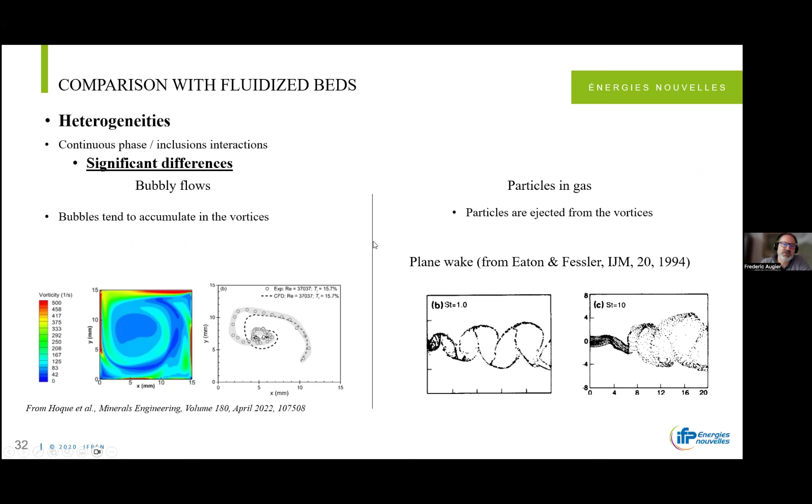So at a given scale, there are very important differences of behavior between bubbles and particles, and at a given scale we will not use the same closure laws and the same forces, nor see the same behavior at the scale of the eddies.

So the conclusion of my talk: we have seen the regime transition between homogeneous and heterogeneous regime. It is still not clear what is the first reason of this transition, whether bubble clustering or bubble coalescence. On our side, we believe bubble clustering is a mechanism that plays a very important role in this transition. We have proposed some recipes to simulate bubble columns with CFD modeling. It is crucial to change the drag force, even if it is something very empirical and not completely satisfying, but it is the only way to achieve good results.

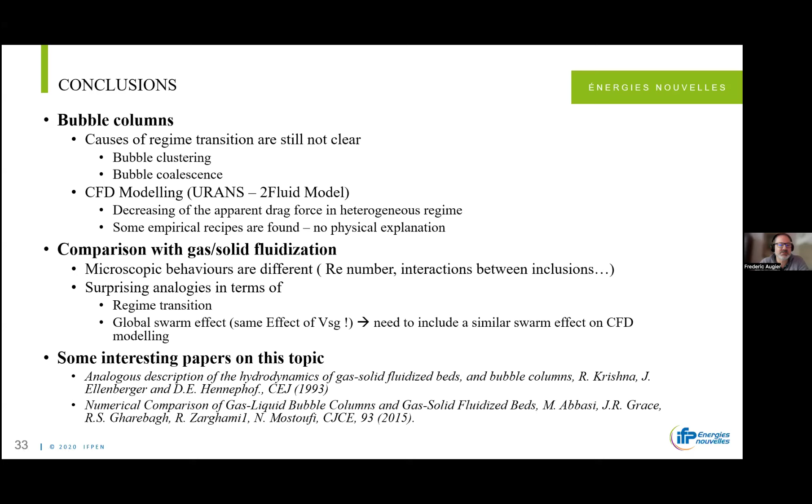Concerning the comparison with gas-solid fluidization, for me there are important differences at the microscopic scale, but surprising analogies in terms of regime transition and global swarm effect at macro scale, as we have seen with the same effect of VSG. For people more interested in this analogy between these two flows, I found two interesting papers: one from Krishna, another from Grace and Mostofi, who tried to compare hydrodynamics between fluidized beds and bubble columns, and also proposed some CFD modeling using the same framework for both cases.

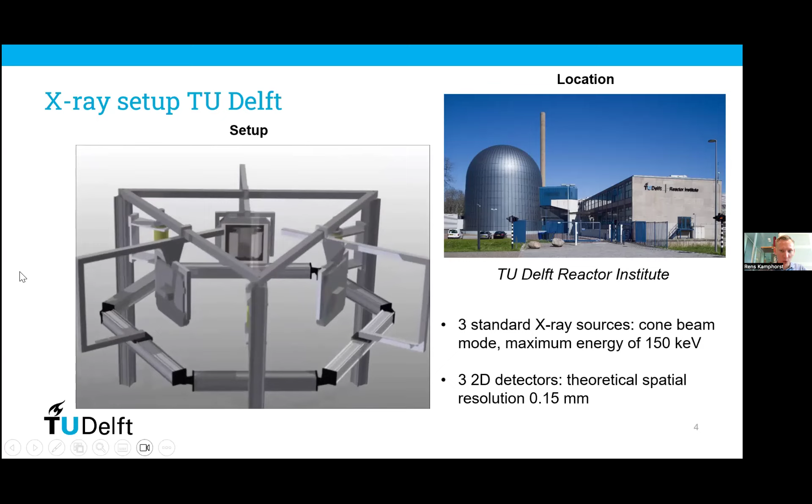And therefore, what you get is essentially an X-ray shadow that is cast on the detector plates, from which we can get a lot of information on the insides of what's happening inside the system that we are trying to study. Now, that's a lot of words. What is a lot more useful typically is just looking at an image. So here's again on the left the setup that we have. We have a source, we have our fluidized bed, and then we have our detector.

And in the first case that I want to discuss, we were looking at cohesive powders. Now, there's a lot of problems with cohesive powders typically when trying to fluidize them because they are very, well, obviously cohesive. The reason for that is, of course, if you make a particle very small, the van der Waals forces become dominant. Particles tend to form agglomerates. They tend to form channels when you start introducing your gas flow from the bottom.

So rather than this nice fluidization that you would typically see for larger particles, we get this if we were to look at a column, which is that a crack is being formed through the bed, and essentially the gas is escaping. There's not really that much gas-solid interaction. The particles aren't flowing around nicely at all, but there is this crack, this bypass. Now, this image, I hope we can all agree, is a really bad way of visualizing this crack in the bed because you can't really see it. And that immediately highlights the need for nuclear techniques.

So here's essentially the same experiment, a bit different, obviously. You cannot exactly recreate the channels. But with X-ray imaging, we can look into the system here, and we can very clearly see the bypass running through the left bit of the column here, which essentially means that our gas is flowing around the particles rather than really interacting with the bed.

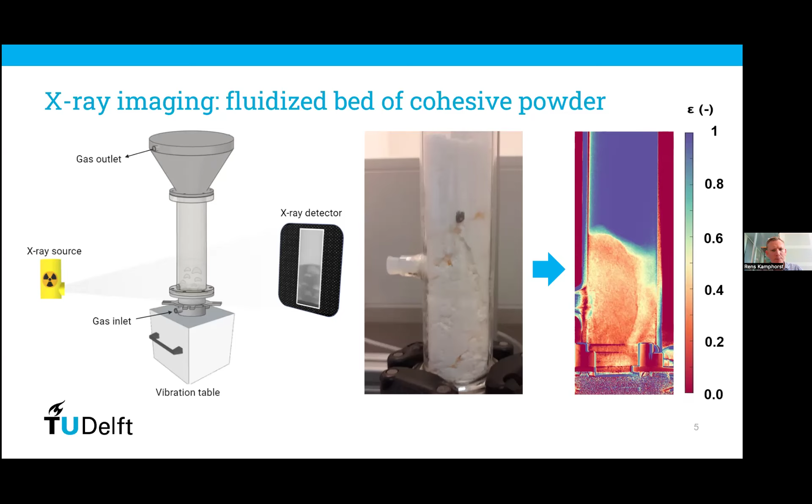Now, what we are trying to do in the research, this is what my PhD was on mostly, is trying to find ways to nicely fluidize these kind of powders, which, as you can see, do not fluidize just by using conventional setups. So the first thing we looked into here is using a proxy powder. So this powder with the particle size 5 micrometers kind of mimics a powder that I'm not allowed to talk about that is used in industry and has had very high potential as a catalyst. Of course, these small particles have a super large surface area.

And then first of all, I showed this image in the last slide as well. We could just conventionally use fluidization, see what happens. And what happens is pretty much nothing. We get this bypass. And if we look at our pressure drops, I don't know to what extent you're familiar with fluidization and the assessment, but usually you want pressure drop graphs to look not like this. They look like a mess. That's all you need to take away from this part of it.

But then when we try to kickstart essentially the fluidization process, what we do is we shake the column. I don't know if you can see my hand. I was shaking like this, but actually we're shaking upside down. Not upside down, up and down.

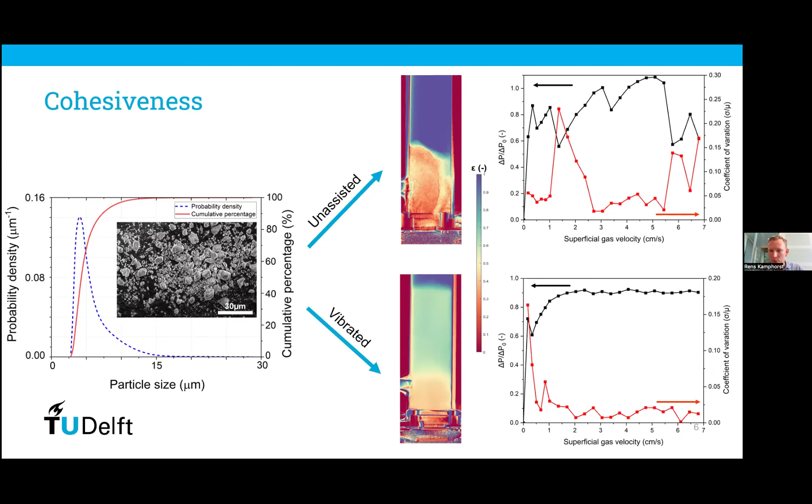Pretty important differentiation there. And when we start doing that, we can see, first of all, looking at the pressure drop graph at the bottom, that we get this really nice plateau at a value of around 0.9. And this translates to meaning that it is very stable fluidization at around 90% of the theoretical maximum. The other thing, if we look at the red line, is that we can see that the coefficient of variation decreases a lot, which means that our system is very stable and homogeneous.

We can also see this if we look at the X-ray. So rather than this one channel that passes through the bed, we can see that there is a nice homogeneous phase, but also we can see at the bottom there's a bit of a denser phase going on.

So if you look at the epsilon scale bar in the side, the blue stuff is all gas, and the deep red stuff is all solids. We can see that when we go down through the bed, we see essentially a section where the density has increased quite a bit. And this is something when we use mechanical vibration that we kept seeing over and over again. This is very reproducible.

And when we calculate the solid fraction in that bottom section, it turns out that at times you can have about 60% of your mass present in that bottom compacted section. And it took us a while to figure out why this section exists, essentially. It wasn't immediately obvious to us. But this is very much a result of the nature of cohesive particles. So because they are really small, they typically tend to be very compactable.

And what we are doing with the fluidization when we are moving our column up and down is essentially we are slamming into the powder bed with the distributor plate at the bottom all the time, creating this really dense zone at the bottom. And now this is for typical powders not necessarily a problem, but when you move to type C cohesive powders, because of their compactability, you get this kind of cake layer forming at the bottom. And ideally, of course, you want your system to be completely homogeneous, so this is not perfect. And therefore, we try to look at different ways of assisting this fluidization, essentially kickstarting this nice process as well.

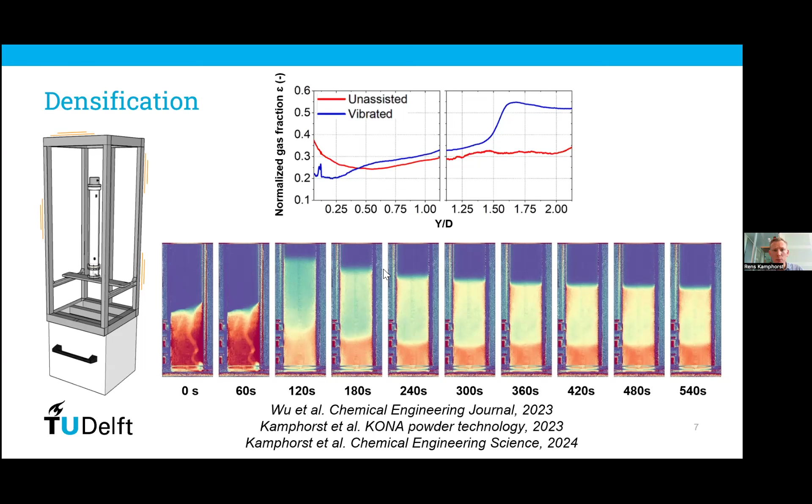And the first thing that we then looked at, which was just essentially the easiest thing we could do, is rather than changing anything about the system itself, like a vibrating table, we thought maybe we can just change the way of operating the system. So we looked at pulsed flow. Now, of course, we didn't come up with any of this. This has already been studied in literature. We're just applying our X-ray imaging to stuff that already has been done to see if we can get more insights. Now, first of all, we only just look at the gas.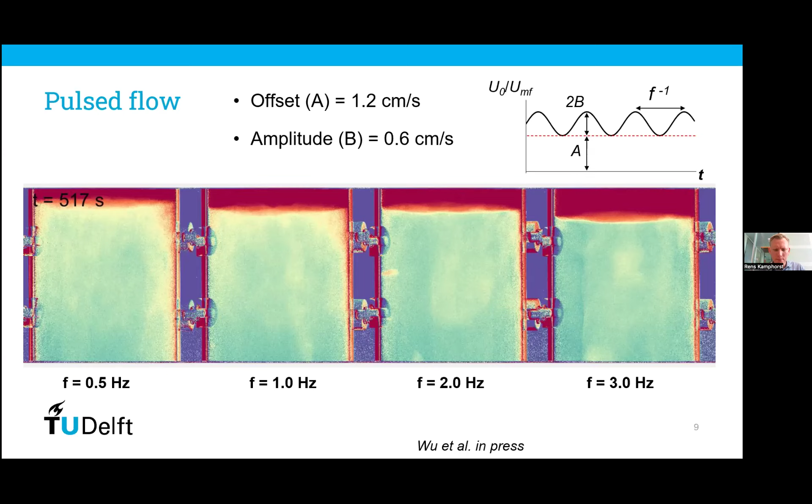And then something we thought of, which we had been theorizing before, but there's not a lot of literature on it, only a couple sources, is mechanical agitation, which is just a fancy word for stirring, obviously. And we thought if we can put a stirrer in the bed, we can push powder around. And essentially, as long as we're breaking those structures that are otherwise being formed at the bottom of the bed, we can keep the bed fluidized.

I know this is all fast forwarded. We did these experiments for a fairly long time. I think off the top of my head, 15 minutes. And the bed remains fairly constant. The density remains fairly low. We get even nice bubbling, which we didn't see for other types of assisted methods.

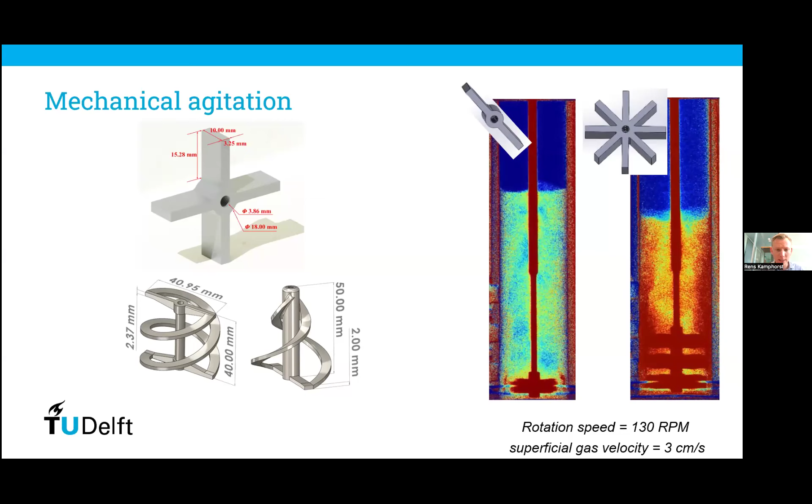And probably my favorite result of the entire PhD is the picture that's up next, because the best thing about 3D printing is that you can ask them to do it in about any color that you can think of. So our lab looks extremely pretty right now, and this is my proudest achievement possibly in life.

Anyway, let's talk a bit about the results here. First of all, the helix design that we used, which again we got from literature already, turns out doesn't really work.

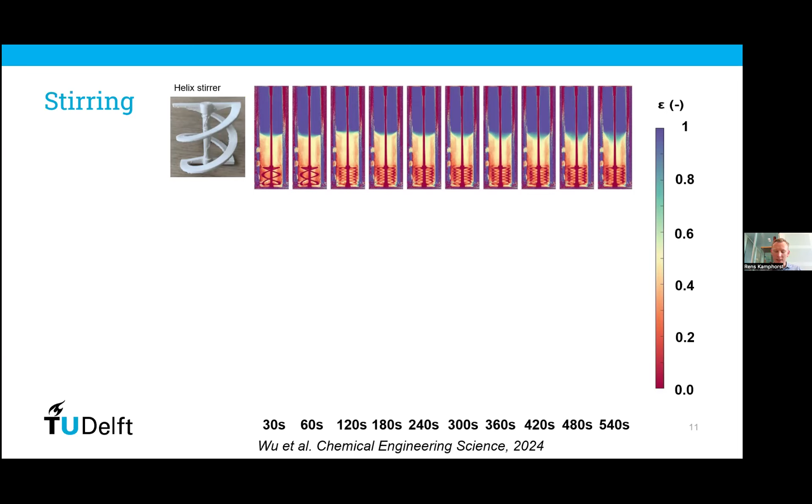If you look at the list of images here, you see essentially the same as with the 8-bladed stirrer from the last slide, where you get these dense sections at the outside of the column. And funnily enough, we made exactly the same mistake here as with the 8-bladed stirrer, because if you think of a helix and look at it from the top, you will see that it has a solid outer ring of plastic, which means that regardless of the full rotation, regardless of the position, gas is always being blocked near the edges of the column.

And therefore, you get these dense sections. There's essentially no gas flowing through there. And that is how we got to that spiral design that I showed in the last slide as well, which works a lot better. It's not blocking as much gas. But the downside to the spiral design here is that it kind of functions as a conveyor belt for the powder, and we keep pushing powder into the center. You can see that there's some denser sections appearing near the center in these cases.

At the time that we were working with this, I was blessed with a master student, very smart, Anna Bakker, and when we were going over the data here, she made a remark that, well, if we can push the powder into the center, maybe put another spiral upside down on top and redirect it outwards. Now, I'm not too proud to admit that I thought that she was making a joke, and I laughed at her, but I shouldn't have, because as you can see here, this is about the best thing that we ever tried in regards to the mechanical agitation study that we did. So kudos to Anna Bakker. Really need to highlight that.

And essentially, it is just what she said. If we look at the images frame by frame, you can see we are still directing powder into the center. But then when it reaches there, we are redirecting it outwards. And essentially, this makes for this very nice fluidized bed. And of course, with the benefit that we don't have those denser sections that we had with the mechanical vibration that we were using before.

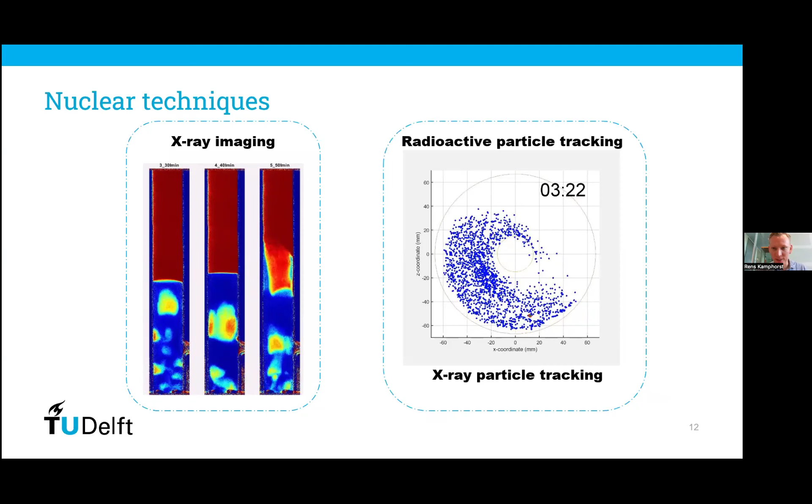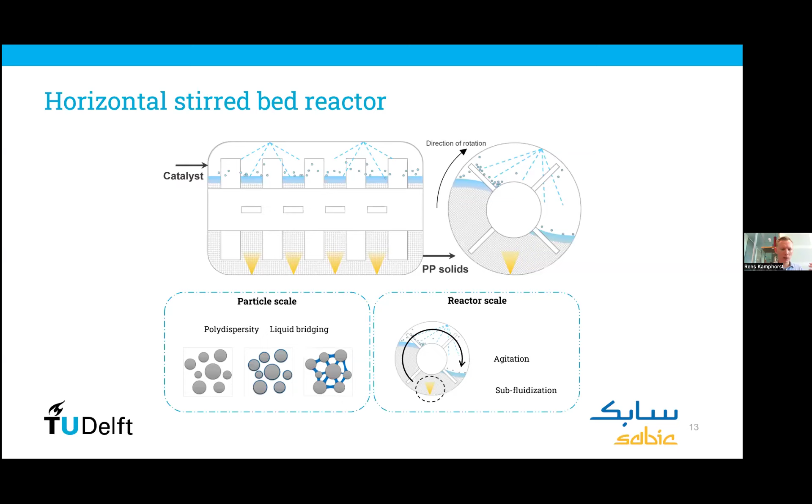So what we need to make sure of is that every individual particle is cooled often enough such that it doesn't overheat, because when it does overheat, the beads start to melt together, and essentially you make one big lump of plastic in your reactor. I've been told that this happens once or twice a year, and literally the only solution here is to stop the reactor and excavate all of the plastic that is in there. This is just to say that the need to understand this particular reactor is of course very high for the company. But we also run into issues when trying to do that with quote unquote conventional techniques.

So both techniques are useful. Just in this very particular case, we need another tool to study what we're trying to look at, and that's how we get to the radioactive particle tracking.

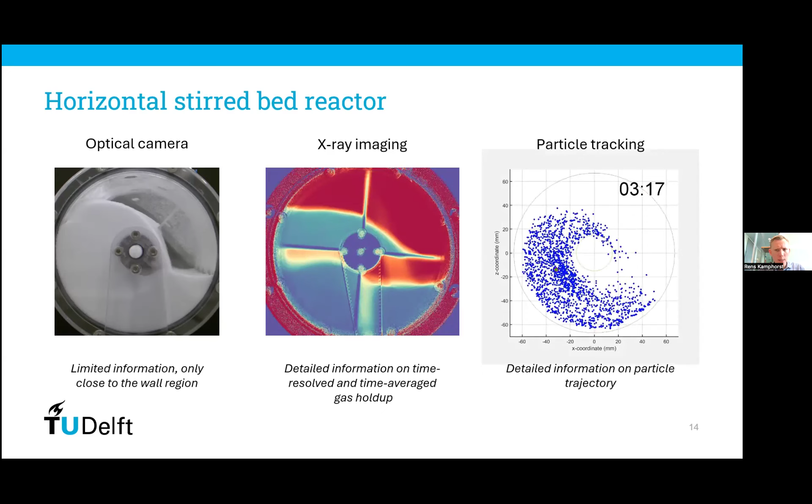So the concept of radioactive particle tracking, in theory, isn't too complicated. You essentially need a radioactive particle and a way to track it. First, for the particle, unless you're blessed or cursed with material that is already radioactive or can be irradiated, you'll need to make a particle that can be irradiated. Our particles were the plastic pellets here.

Now, we cannot make them radioactive. So what we did is make a tracer particle that mimics the particle properties of the bed as closely as possible. Then we drill a very tiny hole in the particle, put some radioactive gold foil in there, and then we can track it.

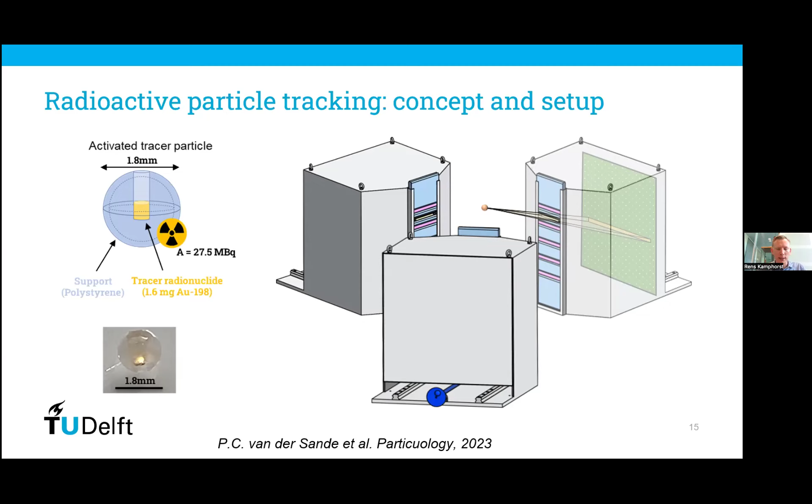In practice, it looks like this. This is the same bed reactor I showed you before. Of course, no reaction is going on in the case I'll present, but we have the 3 detectors. We put the particle in, and then we rotate it for a very long time to get a lot of data.

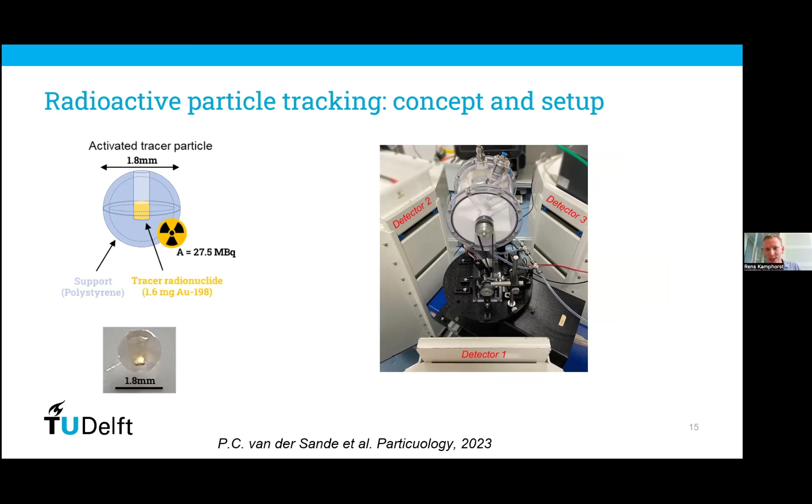First, just marvel at this video that Christian made - I don't know how he did it, it looks amazing. We're essentially tracking that one particle over time here. Of course, it is rotating because the impellers are throwing it around the particle bed. But as visually nice as this is, probably graphs will do better, especially for papers.

So what you can see here is time-averaged flow fields - the direction the particle takes in a given position, the frequency it appears in certain places, and the velocity profile. What you can already see if you look at the top row, for 20 and 40 rotations per minute of the impeller, is that just below the impeller on the left there appears to be a bit of circulation of the particle.

This might be a hint that the particle is not actually carried to the top - it's not cooled down enough in the actual system. Therefore, this may be a bit of a problem.

I can see this better if we take time-averaged particle holdup, shown on the left here. We take different fill grades, shown on the y-axis of the rows. Here you can again very clearly see that for low fill grades, 40% of the reactor volume, and low rotation speeds, the particle is actually kind of trapped in this zone to the left of the impeller, meaning there's a real risk the particle isn't cooled often enough, can overheat, and you get this really big bead of plastic that you don't want in your reactor.

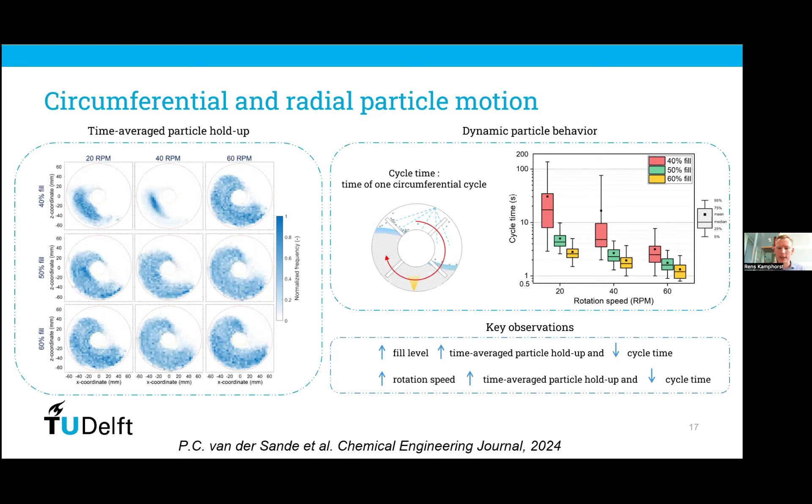So both fill level and rotation speed, ideally you want to increase them to get your cooling down. Now this reactor is a bit more complicated than that because it's not a 2D reactor, obviously it's 3D.

And if we look at the top for the actual dispersion of the particle, we need to think about the way that the reactor works. Ideally, it would be a plug flow. So your catalyst enters and then all of the particles leave at the same time, very nicely, having this very nice particle size distribution that essentially is very narrow because they all spend the same amount of time in the reactor.

However, what we can see here, if we increase the fill grade and the rotation speeds, I can also show that in this graph over here on the left, is we see that the axial dispersion increases, and therefore you get a bit less plug flow and a bit more mixing into your system.

Now, luckily, it's not up to us to actually optimize the reactor. But if we look at the observations that you get here, it means that with rotation speed and fill grade, your axial dispersion increases. So this essentially means that it's really good for your cooling, and you kind of need it to make sure that you're not overheating your reactor. But at the same rate, you want to still minimize it to maintain your product quality.

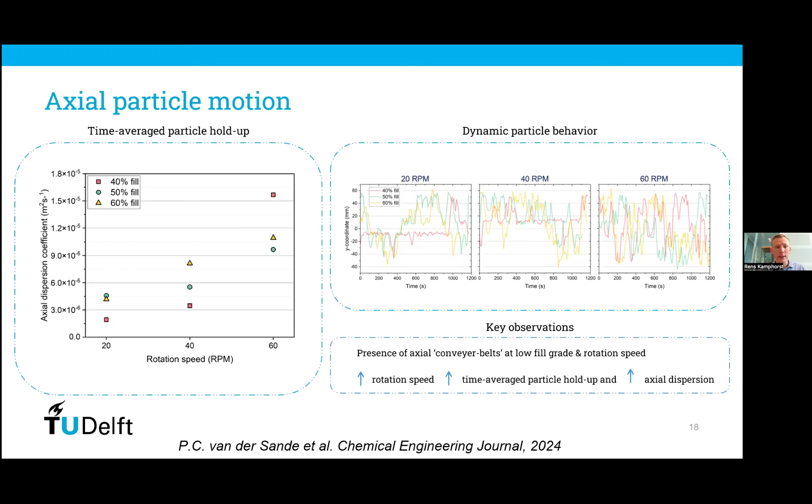Now, as I said, luckily, it's up to the people over at SABIC to actually figure out how to operate the reactor. But it's kind of a nice way to show that this radioactive particle tracking allowed us to look into this system and find these kind of correlations.

Then finally, as a bit of a preliminary thing, you don't necessarily want to work with radioactive particles a lot. So we are also looking into ways to do particle tracking, but with X-ray, which is still not super healthy, but a bit better, at least.

And what we found is that potassium iodide has really good attenuation properties, essentially killing a lot of X-rays when it has to pass through them. So this means that if we can impregnate particles with this potassium iodide solution that you can see on the left here, the bottom of those images is a particle on the left-hand side, just a normal particle, and on the right-hand one that we impregnated, you can see that on the X-ray it very clearly shows up.

And then I can play the video on the right here. You can see that even with the X-ray, we can still kind of detect the particle. It's a bit harder, it's not as accurate as the radioactive particle tracking, but of course it has a lot of benefits with regards to the operation.

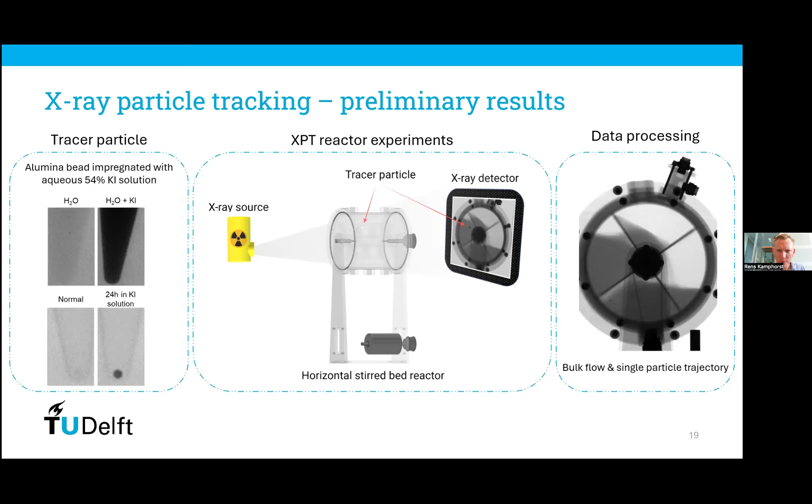This is ongoing work though. We're still playing around with the settings of our system a bit to optimize this. But yeah, that's a bit of the ongoing work. So we are still expanding our operations of the nuclear facilities that we have available here.

With all of that being said, I have one big conclusion that I already spoiled in the first slides: nuclear techniques allow for insights into opaque systems. I also want to highlight that this is both for fundamental research, which is more the first part of the presentation, but also for applied research. We can really do case studies and apply these techniques to them.

Now, for the X-ray, you get a lot of hydrodynamic insight, which can be extremely useful. And then for the radioactive particle tracking, it's really when that individual particle motion becomes important. You can get these velocity profiles, you can identify the dead zones, which especially I think is really, really cool, and which is really nicely visualized by the work of Christian.

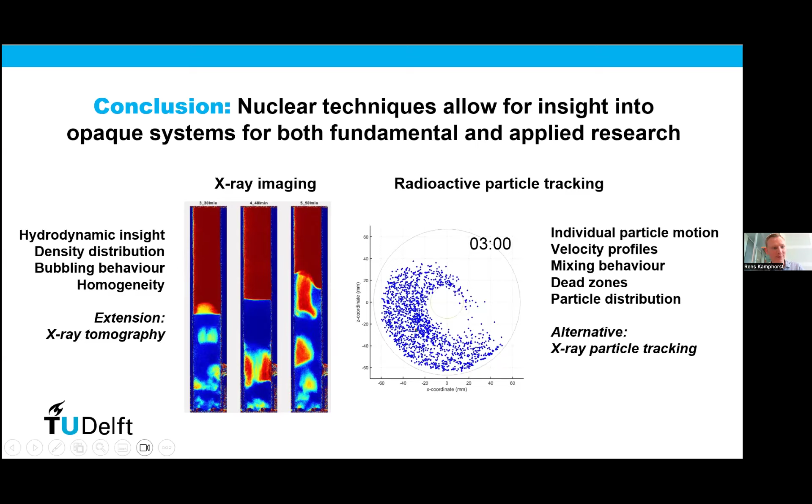We have a question from an anonymous attendee: very interesting presentation regarding the RPT. How does this differ from positron emission particle tracking? What advantages does RPT have over PEPT?

Yes, this is a very good question, and this is where I have to take the mask off and say this is Christian's work, so this is the part I wasn't directly involved in. I'm sorry, I cannot really give you the answer here. I assume he discusses it in his papers' introduction sections, but I can't give a satisfactory answer. There is some good work done in Birmingham by the group on PEPT. Any other questions?

I see one question on the temporal and spatial resolutions of the technique. For the X-ray imaging we do, you can play around with it a bit, but usually we shoot at 50 hertz, and the spatial resolution is about 200 micrometers, which is the pixel size on our detector. But it works like a projector, so the position of your object relative to the detector influences the actual size of each pixel you're looking at. So you can play around with that, but we usually shoot at 200 micrometers per pixel and 50 hertz.